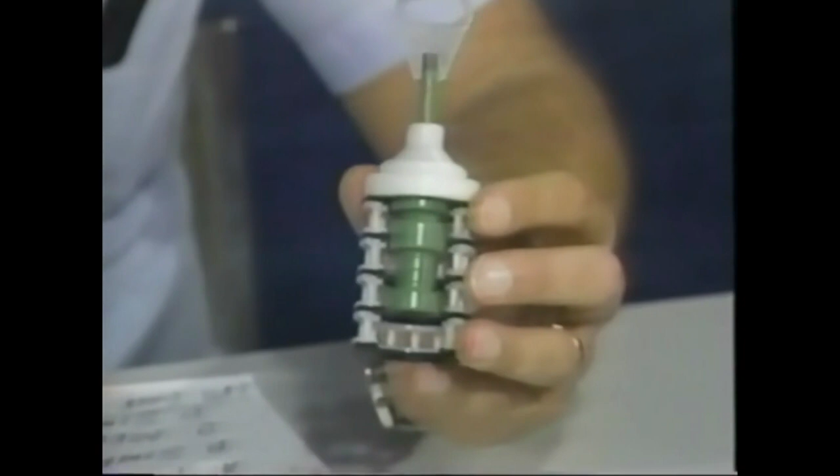A couple of the unique features in the 5600 series control I'd like to talk about at this time is the piston seal spacer concept around which the control is designed, which is really the heart of every Fleck valve on the market. The reason it's so unique is as the piston is indexed by the drive motor, it moves down and then back up through the stack of compressed seals and spacers, completing its regeneration cycle. As it does this, the piston lobes are wiped on the inside diameter of each of the seals, and we can, in effect, call the control self-cleaning.

The second feature related to the piston design is the hole in the center, which equalizes the pressure above and below the piston at all times. Since the piston is the only in-stream moving component, we keep the pressure inside of the valve balanced so that the motor which drives the piston is not working any harder if it's on 120 pounds inlet pressure versus 30 pounds inlet pressure. The other feature available in the 5600 series control is the meter option.

You notice that the impeller in the meter moves quite freely and is quite sensitive at low flow rates. It can register flow rates as low as 0.15 gallons per minute, or as small a quantity of water as a pint per minute, and it's accurate at low flows of 0.25 gallons per minute, approximately a quart. The meter monitors the flow of water coming from the outlet port of the control and registers quantitatively how much water has been used since the previous regeneration, therefore scheduling subsequent regenerations only after the entire capacity of the softener is expired.

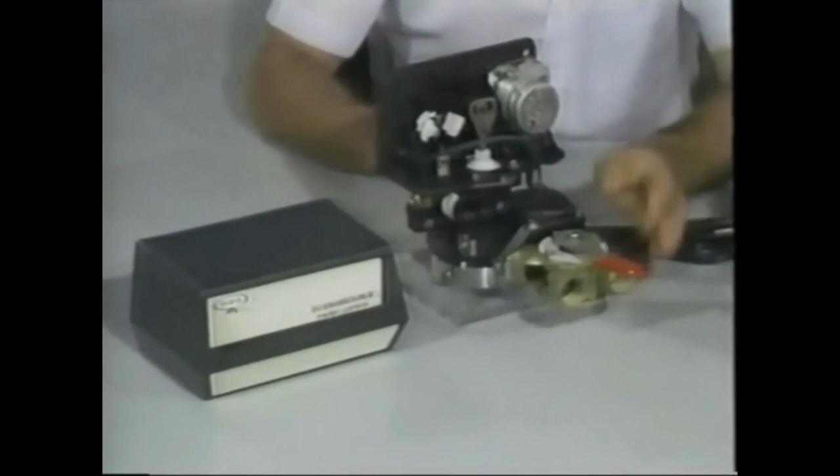Bill, the L backplate provides the same function whether it's metered or day clock version as a standard 5600, but it does give a different appearance to the basic design. Also, from a service aspect, when you take a look at the exposure of the back cover assembly, the timer and the basic parts in back of the control valve are fully exposed and much more easily accessible.

One other thing I should have mentioned is that I referred to the 12-day model and the meter model. We also have a 7-day skipper wheel model, so we can offer 12 or 7-day programming or the demand meter. Now we're going to take a closer look at some of the design options, and we're going to use some slides at this point.

To summarize our design options, we'll begin with a view of the 5600 12-day control, which is a lead-in page in the catalog as well as a cover page for many of the service manuals that our customers use. It also resembles the ad which appeared in the trade magazines over the last 5-6 years when we advertised the 5600 series control.

Here we have the 5600 meter control, trade named Econominder, catalog title page, and it is also resembling the ad which appeared in our trade magazines over the last 5-6 years. And it appears in this picture here, the standard housing without the cover.

The 5600 main valve body design is illustrated here, and note we have our piston seal spacer parts group, we have our yoke option, and we have our injector drain module assembly, which includes a brine valve, injector throat nozzle and screen, injector cap, and the brine line flow control assembly.

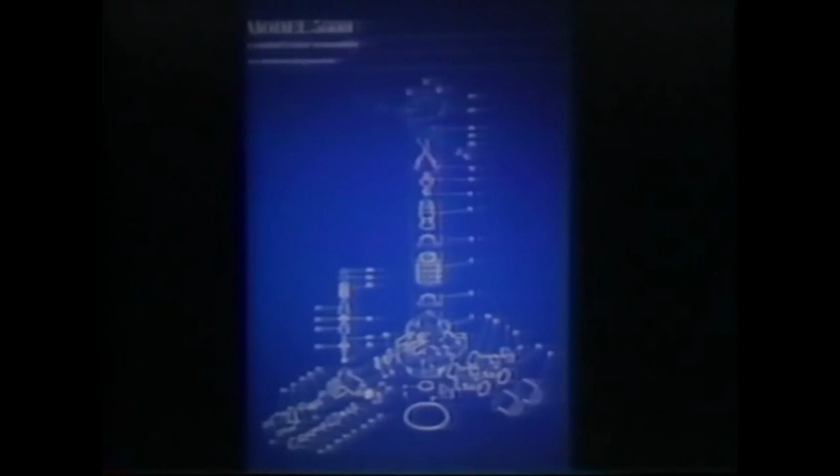What's really convenient about the design of the 5600 valve body assembly is that it can serve either a 12-day clock model control or a 5600 meter control application. The body assemblies are completely interchangeable. Here we're illustrating the 12-day Powerhead assembly.

The top half of the illustration shows the parts that attach to the front of the clock case, while the bottom half shows all the parts that mount to the back. About the only thing you'd service in the field on the Powerhead assembly, or replace, would be the motor assembly itself. Electrical voltages available are 24 volt, 110 volt, or 240 volt.

To point out another significant design feature in the 5600 control, we've cut away the clock case from the timer assembly to show you the side view of the three main gears on the back side of the timer. That gearing is all plastic to plastic, 3/8 inch thick, and it ties in with the feature we told you about earlier regarding the way the piston is designed.

Remember, the hole in the piston equalizes pressure throughout the valve body, which makes it easier for the control to transfer into regeneration. The thickness of the gears we've chosen to go with here is really about 3 times thicker than we have to be, because we don't need heavy-duty gearing to transfer that workload from the motor, due to the fact we've equalized pressure in the valve body by drilling that hole through the length of the piston.

We do this because many times people comment that they believe the valve is of superior design mainly because we made the gears thicker, which in their mind makes the gears stronger and less likely to crack. But really the story begins way back with the design of the piston equalizing internal pressure in the valve, which makes the job so much easier for these gears to function without breaking.

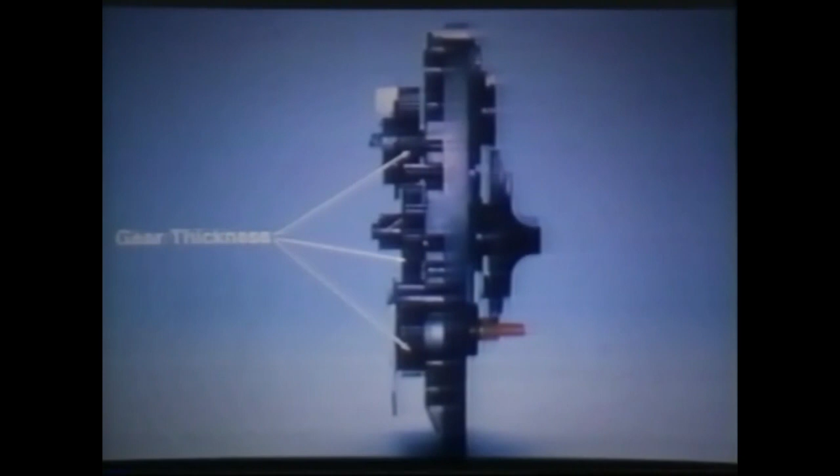This is the 5600 meter Econominder Powerhead assembly, and it bears many resemblances to the 12-day Powerhead we just looked at, but the main differences are our meter program wheel, and then our cable and clutching assembly.

Oftentimes the question is asked, can we rebuild a 12-day clock housing into a meter clock housing? The answer would be no, because notice we do have a pinion that must come through the front of the clock housing in order to drive our meter program wheel.

So if you started with a 12-day clock housing, you wouldn't have the proper face label on the control to accept the meter feature. Also, our instructions over in the left-hand corner on the label for setting the clock are a little bit different for the meter control versus a 12-day control.

Our bypass valve illustration reminds us that the internal plastic plug, located within the rubber boot, is the moving part. There is no in-stream moving part, which is the main design feature of the control, in that the valve may be in service or bypass position for an extended period of time, but we don't have to worry about it becoming stuck permanently, because when we transfer it to the other mode, the part that moves is actually out of the stream of water.

This slide summarizes the options available on the plumbing end of the control system. Here we have a 3/4 inch bypass that's also available in 1 inch. This particular model is nickel plated. Then we have the 1 inch and 3/4 inch brass yokes, and here we've got the brass, either 3/4 or 1 inch, bypass.

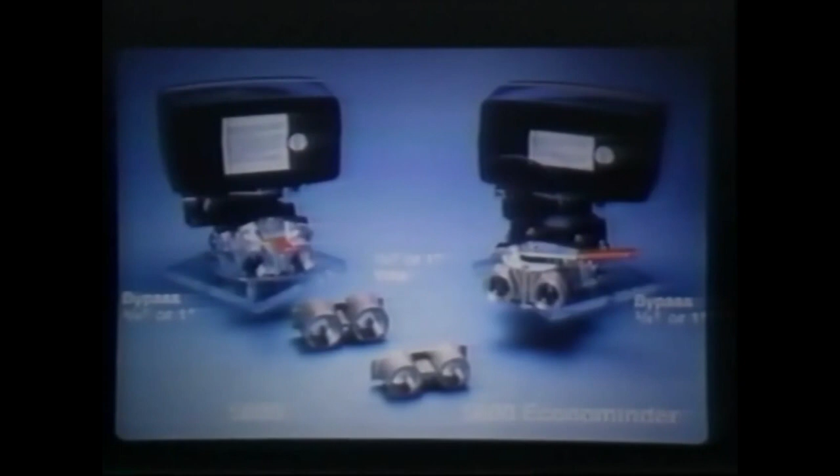Here we show the 2 basic color combinations available in the face labeling on the control. On our 12-day model, we've got the black label with the silver blue pinstripe trim. We also offer a beige label with a brown and an orange trim.

On the meter control to the right, this is the trim that has been advertised in the trade magazines over the last 4 to 5 years. It's probably the most popular trim color, the orange, beige, and brown. We also have the silver, black, and two-tone blue, and then we also have covers that fit the face front in beige, blue, or dark gray.

When training a new serviceman, the easiest thing to do is show the man how to take things apart and put it back together. The most difficult time comes when he has to go to that first job site and analyze what the service problem happens to be. When we were training service people back in a dealership I was involved with, we came up with a mental checklist referring to 4 letters.

BTTB. When a serviceman would come to the job site, he would set his tools down, repeat those letters, and then start a systematic approach to servicing. The first letter, B, is check the bypass. Many homeowners like to play around with bypass valves. On the 5600 valve, when the handle points straight back towards the pipes, the unit's in the service position.

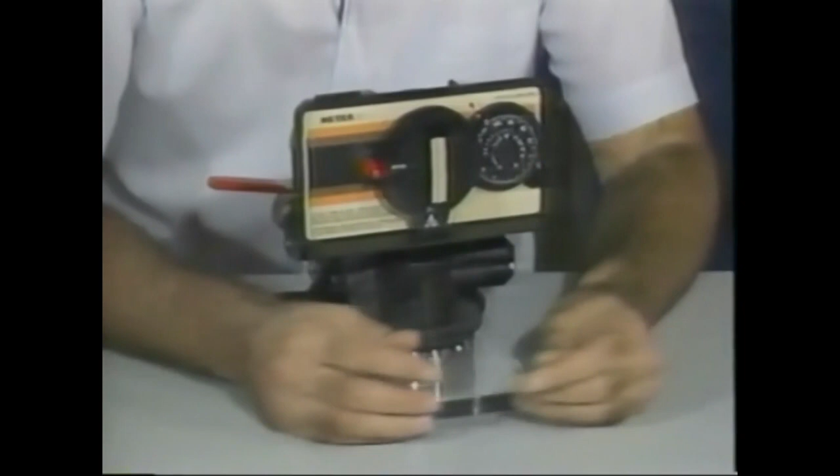Let's say you go to the job site, remove the cover off the timer, take a look, and the unit recycled last night. You check the cold water that comes directly out of the water conditioning unit, and it's 0, soft. You check the hot water, and possibly it could be 15, 14 grains hard, on that 20 grain hardness example I gave previously. The unit is going through the cycles, but for some reason it's not keeping up from cycle to cycle.

Let's say you go there and just the opposite is happening. You take a look at the timer assembly, and the unit's going to regenerate tonight or possibly tomorrow night. Again, checking the cold water right out of the water conditioning unit, you may have hard water. Checking the hot water heater, again, it may not be total hard or total soft, but something in between. Again, an example of running short of capacity.

The areas that I used to work, running short of capacity primarily ran into toilets running. When you lift the back of the toilet tank off and look where the overflow is, if that level of water is right near the top or dribbling over into the overflow at, let's say, a pint a minute, that's like adding an additional 180 gallons in a 24-hour period.

Whether it's a day clock or a meter type version, you never set the program up to compensate for that. Also, I would have calls right after the holidays—4th of July, Thanksgiving, New Year's, Christmas—where again, you set the equipment up for 3 to 4 people in the family, but now for the holidays, you have 20, 30 people over using the conditioned water.

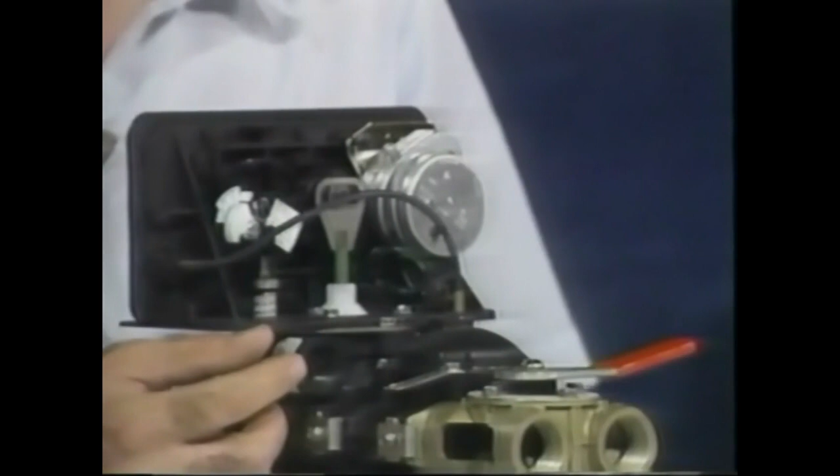Looking at the back of the unit, the only way water can get back into the brine tank is if this poppet valve right here is pushed open. When you push that open, water goes back into the brine tank, and when it's done filling on a timed brine basis, that poppet valve has to snap shut 100%. If for some reason, some foreign material or through wear and use, the valve does not 100% shut off, water will continue to drip back into the brine tank. The water level will get higher and higher.

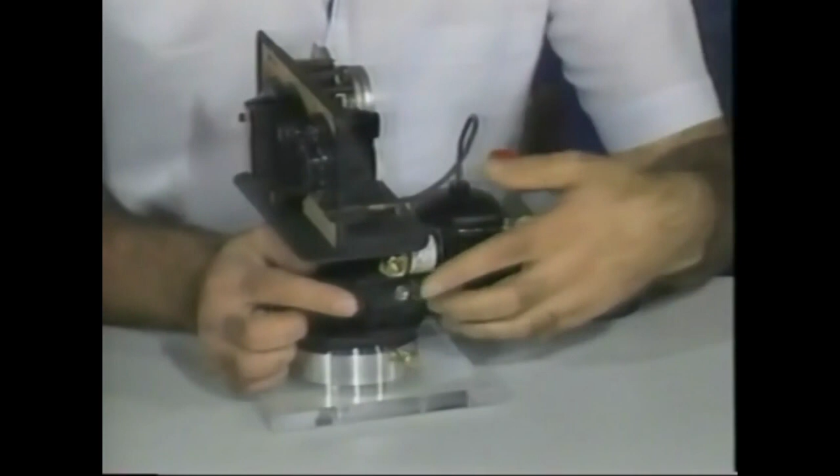To check for this very easily, with the unit in a service position, disconnect the poly tubing at the brass fitting here, or in the brine tank. No water should be coming out of that fitting at all. If you get a constant drip or water leaking out, you know that that brine poppet valve is the key thing to key into. Also, on all time brine refill units, whenever a unit goes through its regeneration cycle and you don't draw all the brine solution out of the brine tank, the unit doesn't know it and it still puts more water back in. That key area to check would be in the injector area, which will be right underneath this cap assembly.

Let's take a look at the second condition, if you had low water in the brine tank. Again, the only way water can get back into the brine tank is if that brine poppet valve, that spring-loaded valve, is pushed open. When that happens, line pressure goes into this brass fitting right here, and inside that brass fitting is a small rubber washer. That controls the water back into the brine tank at a certain flow rate - either a quarter, a half a gallon a minute, or 1 gallon a minute.

If for some reason that small rubber washer becomes partially plugged up with foreign material or whatever, it's not going to allow the water to go back at the correct flow rate. The timer times itself out, and your liquid level will be much lower than what you normally had set it for.

The third condition is the most difficult one because you've checked the other items - the bypass, the additional people in the family. In this instance, I would tell the man now to take the cover off the unit and start cycling the unit through, cycling the unit into the backwash position. In this position, you should hear a high flow rate coming to the drain.

Advance it to the brine and slow rinse position. In this position, the flow rate at the drain should be greatly reduced, probably 1/3 to 1/2 gallon a minute. Advance it a little bit further into the rapid rinse and settling rinse positions, and again you should hear a high flow rate running at the drain. High flow rate, low, and high flow rate are normal cycles of operation.

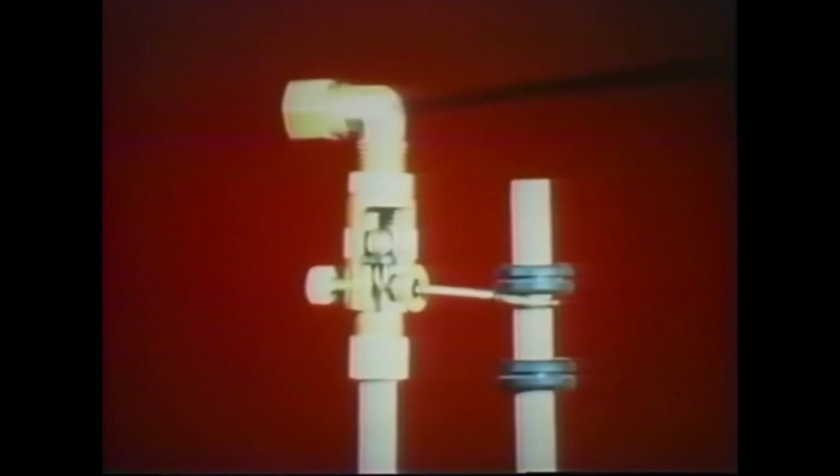As the water level starts increasing in the brine tank due to a leaky brine valve, or an injector assembly plugged up, the float assembly will start rising, allowing the ball inside the brine valve to drop down and shut off, stopping any additional flow. The service call then will basically be hard water or salty water, because too much water is in the brine tank, dissolving too much salt.

One of the key things in working with safety brine valves is the location of these rubber grommets. You should always have approximately 1 inch of space between the rubber grommets where the arm assembly comes out. If those grommets are pressed together, when the water level starts increasing, instead of the float assembly rising straight up, it'll angle off, hit the side of the brine well, and not shut off as designed.

The other thing to watch for when working with a safety brine valve is the location of this PVC tube in relation to the brine well cap on top of it. You should always have that tube assembly down far enough so that when the water level increases and the brine float system rises, it doesn't hit the top cap and prevent it from shutting off.

The 500 air check has been around for a number of years, and we're approximately in our 3rd generation. As you noticed in the original photograph of the safety brine valve assembly, you had kind of a J effect for the air check assembly. That J air check assembly has been around since the mid-60s.

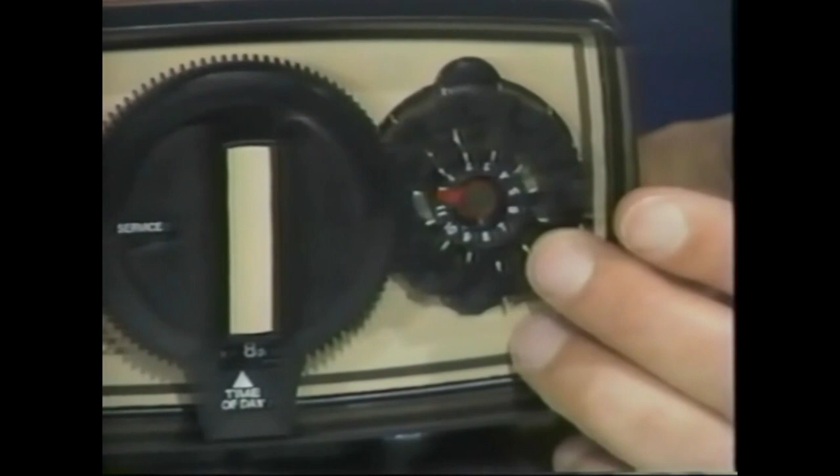If we want regeneration every second day, we would have every other tab pushed out. Every third day, every third tab, and so on. The most popular timer control mechanism on the market happens to be the 12-day, because you can do more things with a combination of 12 skipper tabs. You could regenerate every day, every other day, every third day, or every fourth or sixth day.

It's much more flexible than the 7-day wheel that we mentioned was also available as an option. 7-day skipper wheels are primarily popular in your commercial industrial applications, where they normally would regenerate a system along the lines of the pattern of the days of the week or the calendar.

Okay, let's take a look a little bit at the metered control system and cover the regeneration setting procedure here. It's quite similar to the one we just talked about. We press in on the red pinion gear and we rotate the 24-hour gear left or right until the current time of day is in the bottom center window. Now, when we go over to the right side of the 24-hour gear, things are a little bit different here, because we have a program wheel, and there's one of two ways we can program a meter control.

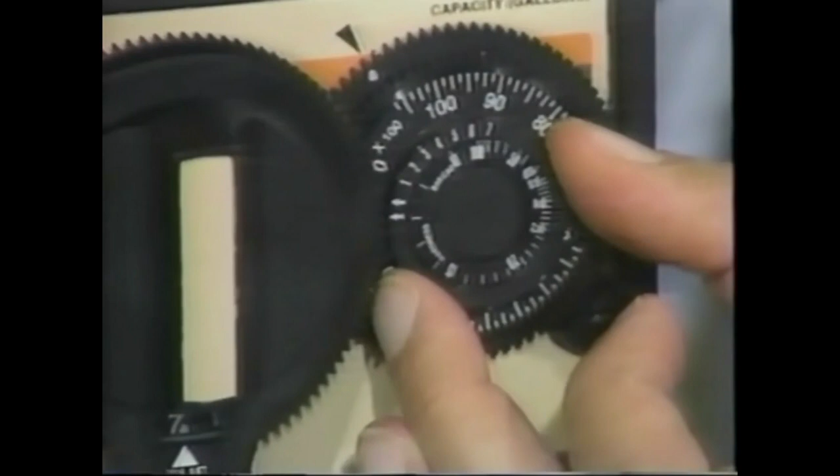The first way we can program, which would be typical of a residential application, we would dial the hardness of the water that we tested in step 2 of the BTTB formula and set it up opposite the number of people in the family. We would do that by simply holding the base gear with my right index finger, and then pulling out on the dial and turning it left or right, lining up the hardness, which is on the inside label, with the number of people, represented on the outside label, numbers 1 through 7. Now, when we have 24 grain hard water and let's say 4 people in the family...

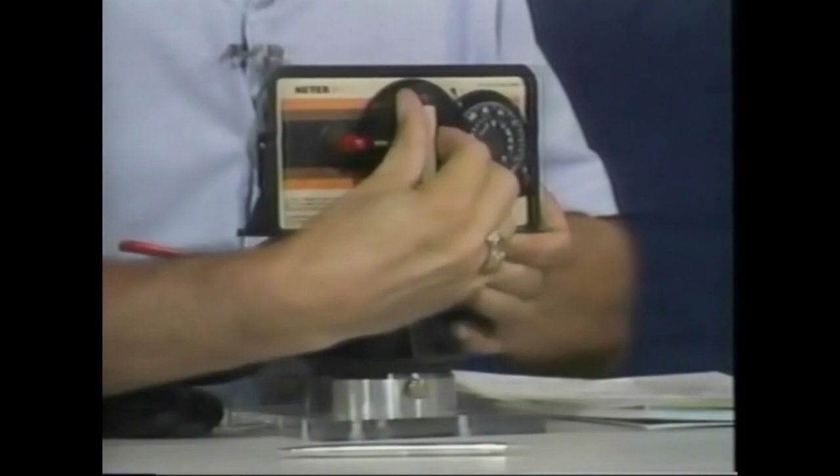We would dial 24 opposite the 4 people and then index the program wheel all the way counterclockwise until it stops, and then simply manually rotate the main dial in the front 360 degrees. That arms the program wheel so that it's at the proper beginning spot for that combination of hardness and family size. Now, the second way we can program a meter control is a method that would be commonly used in commercial and industrial applications.

That's where we program in terms of gallons between regeneration. Now, obviously, with no family size to make reference to, that would seem like the natural thing on most industrial commercial applications. So just picture this program wheel without a people label or the outside dial or the hardness label, which we used to orientate with in the first example. Now what we would do is calculate how many gallons of capacity the unit is going to give us with the salt setting that we have.

For example, let's say we had a cubic foot unit, 24 grain hard water, and we were brining it at 8 pounds of salt. Well, that would yield 24,000 grains of capacity, or 1,000 gallons.

Now, if the business the unit was installed in, for instance a restaurant, used an average of 300 gallons per day, we would subtract 300 gallons from the available 1,000 gallon capacity and call that reserve. Then take the 700 gallons remaining, the usable supply, and holding the base gear, pull out on the program wheel and line up the number 700 in the gallon label, the outer label, opposite the white dot on our wheel. That tells us we're now programmed for 700 gallons between regenerations. But as in the first example, we always have to orientate the program wheel to the current time of day.

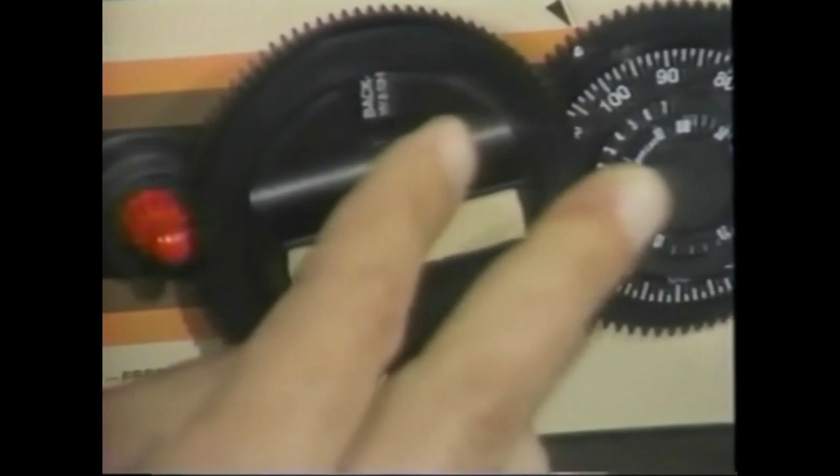Okay, let's say we wanted a manual regeneration because we were expecting company in a residential application, or in the case of that commercial application we just covered, we had an extra busy day at the restaurant. To get the manual regeneration, we would simply turn the manual knob approximately 2 clicks, and we should be able to read the abbreviation regen in the cycle position window. At that point we can walk away from it and the unit will regenerate automatically. The timer motor will engage the gearing and bring our main gear all the way around.

The unit would regenerate at whatever time of day we initiate it. Now typically the controls are set up at the factory for a fixed 2 a.m. regeneration. On a 12-day model, the red arrow on the skipper wheel indicated the next time at 2 a.m. that the unit would regenerate if the tab were moved away from center. In the case of the meter control, we always have a reserve capacity to take us from the time the meter wheel zeroes out until the next programmed regeneration, which is going to be at 2 a.m.

But let's say for some reason we don't want a 2 a.m. regeneration. For instance, it's a business where there's always water being used at that time of day. Or in the case of a residence, the man of the family works, gets home at 11 o'clock in the evening, maybe doesn't go to bed right away, and showers at 2 or 3 in the morning typically. Well, we can show you how to have that unit regenerate at a fixed time of day other than 2 a.m. We'll get into that with our slides a little bit later on, but it is possible to have the timer field adjusted so it can regenerate consistently at some other time of day than 2 a.m. We'll demonstrate that when we use the slide set in just a few minutes.

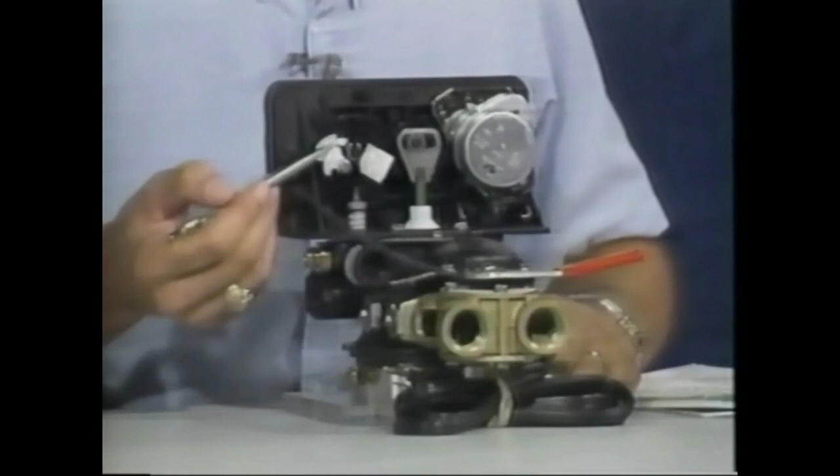There's a 3 to 18 pound salt scale, which tells me the brine line flow control button is refilling the brine tank at a rate of 1/4 gallon per minute. Or the second scale we might run into on a control would read 6 to 36 pounds, which would tell me we have a 1/2 gallon per minute brine line flow control button. Whichever label we have, we must select a position for the white lobe pointer so we know the volume of salt used per regeneration. Now, how much salt should we use?

That's a question of how much resin or capacity by volume there is in the tank. For instance, in our example of a cubic foot unit, let's use 8 pounds since that's a fairly universal medium salt setting. With 8 pounds of salt, we would recover 24,000 grains of capacity. All we'd have to do is loosen the center screw and make sure the brine lobe, the white lobe pointer, ends up on 8 pounds, then retighten that screw. Every time the unit comes around during regeneration, the refill poppet valve will be open for the amount of time that allows enough water, which will dissolve 8 pounds of salt, to enter the brine tank.

Now, if we wanted to change this, we have to be very careful with demand regeneration systems, because when you cut a salt setting, you're really reducing the recoverable capacity of that unit. We generally never want to reduce a salt setting on any demand system, because the meter is programmed for the number of grains of capacity based on the original volume of resin and the original salt setting the manufacturer put on the unit. If we cut that salt setting, we'll come up with some volume less than 24,000 grains, as in our example. Conversely, you should not arbitrarily increase the salt setting either, because the unit will still regenerate as though it only had 24,000 grains, and now we'll be wasting salt, and the homeowner won't be very happy with that.

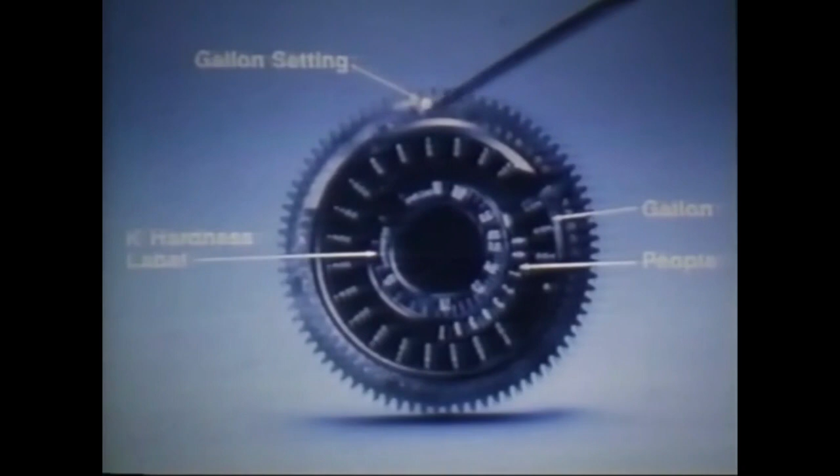We might want to do this in a situation where a 2 a.m. regeneration is not desirable. If we disassemble the timer manual knob assembly and get access to the 24-hour gear, we can lay another label down right on top of the label that's already in position on the 24-hour gear.

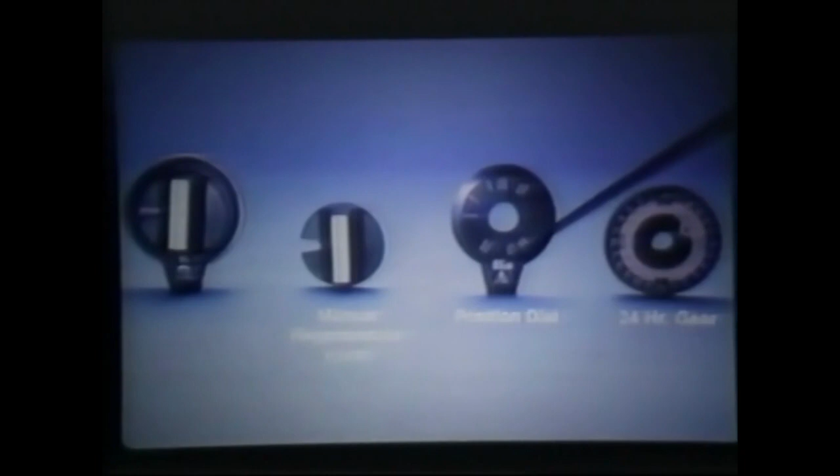Let's say we wanted the unit to regenerate at 6 a.m. every morning. We would take that new label and line up the 6 a.m. right on top of the 2 a.m., then stick the label down in that position. What we've done is offset the timer 4 hours. We just reassemble the assembly and dial in our current time of day, and we have in effect cheated the timer by 4 hours by intentionally mislocating the label that 4-hour interval.

Every motor is date coded with a 4-digit number. The number 2144, for example, would represent February 14th, 1984. We decipher that by taking the first digit, which is a 2, representing the 2nd month of the year. The middle 2 digits, the 14, represent the day of that month the motor was made. The last digit, the 4, is the last digit in the year. Again, that would be February 14th, 1984.

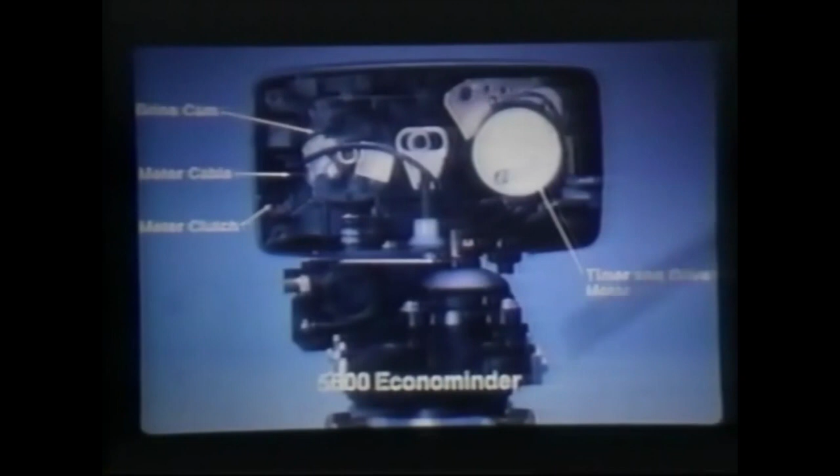This illustration is very, very important in applying the control properly. We've got our brine valve assembly and our brine gear assembly. The value we have our brine refill lobe dialed to, in this illustration it's on number 18, indicating 18 pounds of salt with that setting, really determines if the system's going to work right, wrong, or marginally.

If we have too much salt, we're wasting the homeowner's money. If we don't have enough salt, we could be in trouble if it's a meter control system, because it's going to be regenerating 1 day too late or 2 days too late since we're not creating enough capacity with an insufficient salt setting. So the best thing to remember is let the manufacturer be responsible for setting that salt setting, and let's not increase or decrease it without having some valid reason for doing so and knowing what we're going to get if we increase or decrease.

Because that's such an important aspect of the operation of the control, we're going to look at the salt curve on the next slide. We're just going to review what kind of capacities you can expect on a hypothetical conditioner with various salt settings, and that hopefully will keep you current on what capacities you can expect with various salt settings and various size systems that you're working with.

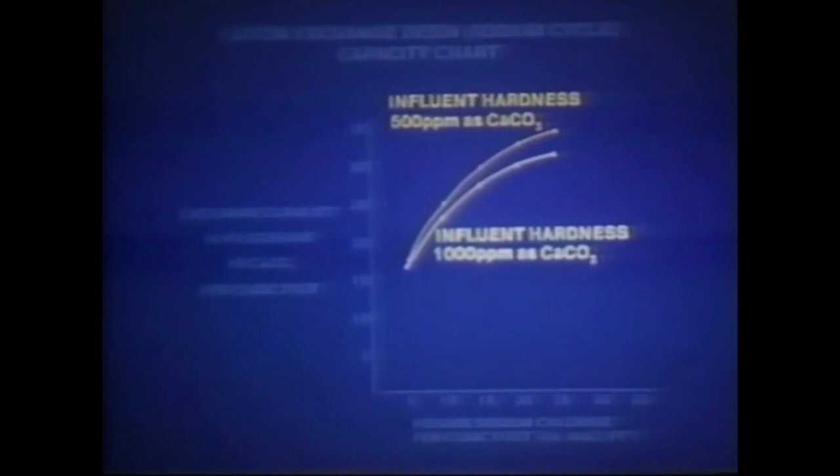This slide we can use to show two things. The first, what is the most economical salt setting? Well, if we use 10 pounds versus 15, we would recover 25 rather than 30,000 grains. From an operating standpoint, the 10-pound setting is more practical, because if we go from 10 to 15, we're using 50% more salt, but we're only getting 20% more capacity. Over a period of a year, that would be bad economics for the owner of the water conditioner.

What we want is a trade-off between economy and operation and the conditions you're working with, namely the hardness of the water at the job site. The most common setting, the medium salt setting as it's referred to, is 8 pounds per cubic foot, and that makes a good setting in areas where the hardness runs anywhere from 10 up through 20 or 25 grains per gallon.

When we get into extremely hard water, we're going to want to go towards the 15 pounds per cubic foot setting, especially if there's iron in the water along with the high hardness levels. The reason is we want to protect against bleed through when we get near the end of the capacity of the bed. We want the full capacity in there working for us, and because our hardness is so high, just a little bit of bleed through could give us 5 or 6 grains near the end of our capacity in that unit.

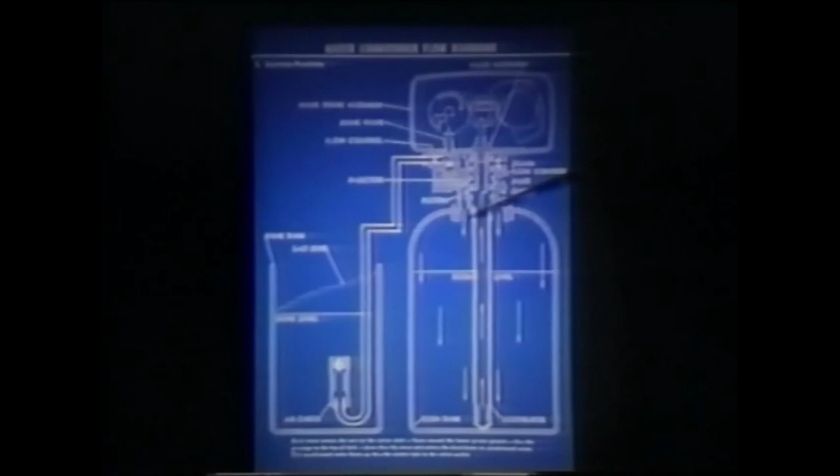Now we're going to take a look at the cycles of operation of the 5600 control. Right now we're illustrating the service position. In the service position, water comes into the inlet of the control, down into the top of the tank on either side of the distributor tube, filters down through the resin and into the bottom opening of the distributor tube, then up the tube and out the outlet of the control.

When we've used the full capacity of the resin bed based on the hardness of the water, the control either regenerates in response to the skipper wheel setting on a 12-day clock, or the meter, which has registered the water as we used it during the service cycle, and a regeneration begins.

The caption along the bottom of this drawing simply explains the operation of the cycle, and in the service manual that comes with the control, it's a handy reference item for servicing the control, whatever cycle of operation it may be in.

All we must do is read the caption at the bottom of that particular cycle, and we'll be tracing for ourselves the flow and direction of the water. It's fairly simple to track down why the control isn't functioning properly using the directions given in the caption and the arrow highlights in the drawings.

The first thing that happens when we go into a regeneration sequence is what we call a preliminary downflow rinse, and the duration of that cycle is approximately 5 minutes.

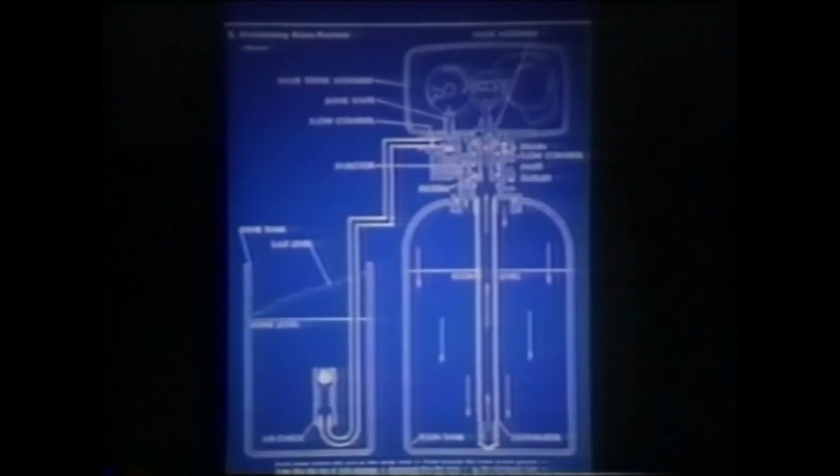There are 8 cycles in all that we're going to talk about. Think of the first 4 as occurring while the piston travels down through the valve, and the second 4 as occurring while the piston returns back up to its upward position. The time cycles on the down side have to be exactly the same number of minutes as the cycles on the upside of the piston movement. The only difference is that when the piston is returning back up to its service position, the cycles occur in reverse order.

In this preliminary rinse-down cycle, the water is actually flowing in the same pattern as it would in the service cycle: it comes down through the resin, up through the distributor tube, and out the outlet.

The preliminary downflow rinse cycle is followed by the backwash cycle. Duration of this cycle is 10 minutes. The function of this cycle is to bring water into the inlet of the control, down through the distributor tube, out the bottom, and up through the bed. Notice that we're flowing in exactly the opposite direction as we did in service and preliminary rinse.

The purpose again is to lift the bed so that any trapped particles on top are rinsed to drain, preparing the resin bed for the following cycle, when we draw brine in to recover the capacity of the unit. Over in the brine tank, our liquid level stays the same because we haven't started to draw the brine yet. All we're doing is expanding the bed, lifting out all the trapped solids on top, and putting them down the drain.

Following backwashing, we move into the brine cycle, which is a fixed 50-minute time setting. We also combine within that 50-minute time frame what we call the slow rinse cycle, which will be illustrated on the next slide. Notice in the valve, we're sending water at inlet pressure through the injector screen up into the cap and back into the injector nozzle, where it's allowed to create a vacuum to draw the brine from the brine tank.

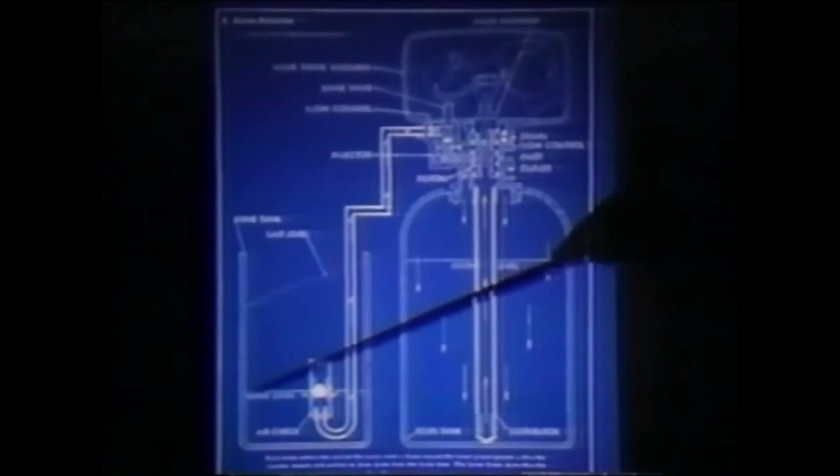Notice our liquid level in the brine tank is now down even to where the ball check is sitting on the seat in the valve. We're going to draw until the ball gets to that position, because of the vacuum created by the injector assembly. Now when the ball check seats in the air check assembly, the injector continues to be fed inlet water, and that's known as our slow rinse cycle.

In the next illustration, the direction of flow through the bed will be exactly the same as in the brine draw, except we're not sending brine through during the slow rinse, just rinse water. The number of minutes of that 50-minute cycle that we're actually drawing brine ends up to be maybe 14 to 17 minutes, approximately 1/3 of the 50 minutes. The remaining 2/3 is the slow rinse cycle. We keep that proportion of 1/3 brine time to 2/3 slow rinse by the injector we recommend on the various size units.

Our slow rinse cycle is appropriately named for the balance of that 50-minute increment, the last 2/3 of the time, because we want to rinse the salt out at a very slow rate. Since brine is a heavier liquid, it naturally gravitates toward the bottom of the resin tank, and the fresh water coming in during the slow rinse from the top of the tank down needs to come in slowly enough that we don't disturb the bed. If we sent it in at a very rapid rate, we might churn the resin, disturbing the stratified manner in which the brine is being rinsed out.

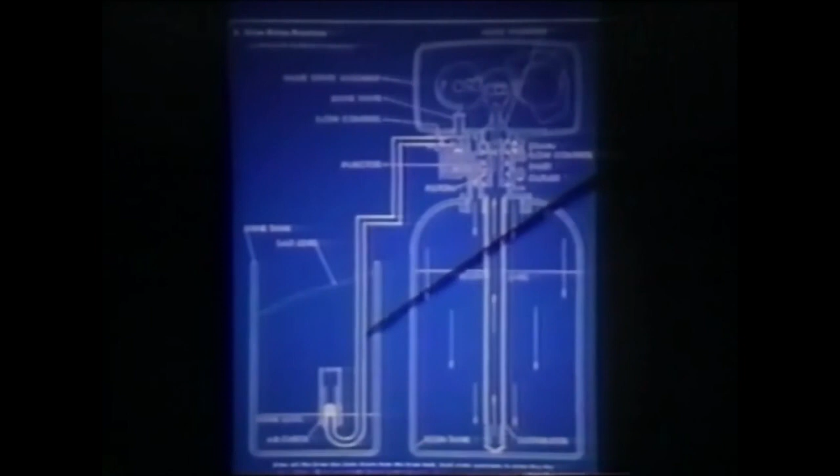Notice over in the brine tank, nothing has happened yet. Our air check ball is still down in the very bottom of the air check cage, and nothing can happen until 2 cycles from now when we refill the brine tank, getting it ready for the next regeneration to follow.

Now we're entering the rapid rinse position, another 10-minute sequence, which relates back to our backwash time when the piston was coming down through the bore of the valve. That first 10-minute increment was the first backwash cycle. Now we're on the upward movement, past the midpoint of regeneration, and the piston lobes are passing the midpoints of the spacer, which allows our rapid rinse after regeneration. The piston is just moving in the opposite direction, driven by the same motor speed, so we have the same 10-minute time increment.

What's happening here is we're coming down the distributor tube, lifting the bed a second time. We've already changed the physical size of the resin beads because the brining has been completed—the beads actually shrink in size after exposure to the sodium in the brining cycle. So if we were in an area with iron in the water, we might find the surface of the resin beads coated with iron. Because the bead physically shrinks about 10% in size due to the brining cycle, we have a second opportunity to rinse out some of that iron, as a result of bead-against-bead abrasive action in this second backwash.

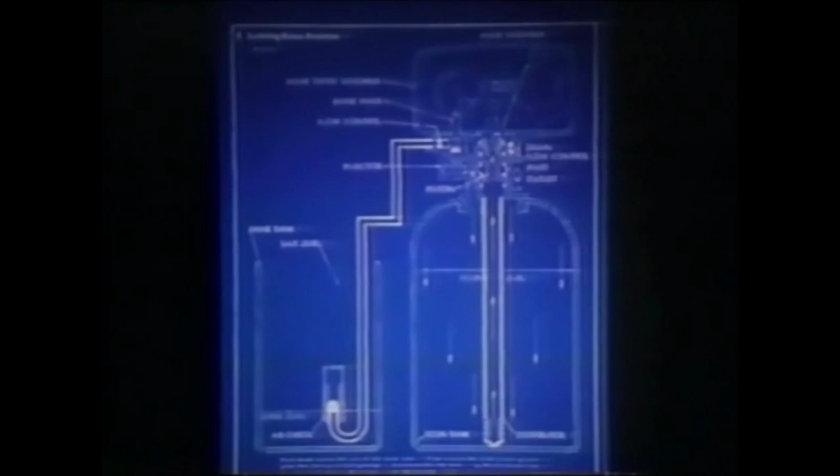Our last cycle of operation in the 5600 downflow brining control system is a brine tank fill. Our inlet water coming in the inlet side of the control supplies both the injector so that it can find its way over and down into the brine tank, and it's metered by our little brine line flow control button, and water is allowed to pass through this cavity for the number of minutes that the refill lobe has pushed down on the spring-loaded brine valve.

And if we were to draw service water during this cycle, the inlet of the valve would also supply a source of water to go down through the resin bed so that we would have conditioned water available if we chose to use any of the service taps during brine tank fill. And that completes the regeneration sequence for the 5600 control.

The injector drain module assembly for both the clock and the meter version of the 5600 are common to both controls. The injector drain module assembly also contains 4 key parts in the control valve for any type of servicing. When we get into it, I'll show you that it contains the injector, screens and jets, the brine line flow control, the brine valve, and drain line flow control assembly. I'll also try to relate those things back to the BTTB and the general checklist in servicing.

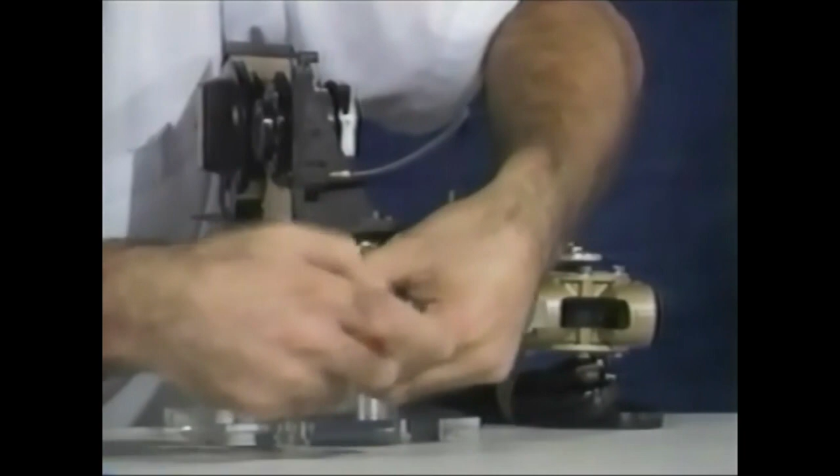To get into the drain line flow control module, we have to remove these 2 cap screws, using a 5/16 nut driver to take those out. The cap assembly will come off. Then grabbing towards the rear of the module and swinging out like a door, that module assembly will come out in your hands.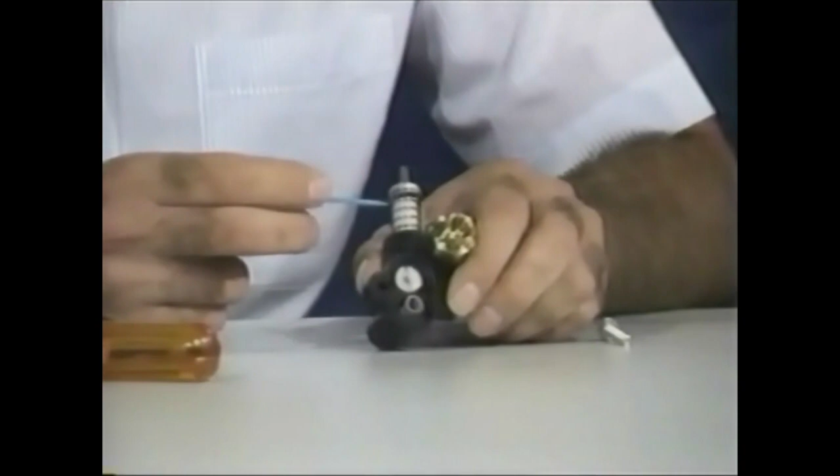The thing that we're keying into first will be the injector assembly: the screens, the injector nozzle and throat assembly. Common problems if this area is plugged up will be salty water, high water in the brine tank, low capacity. The flow of operation: the water enters through this screen assembly, loops over the cap and into the white injector assembly to create the venturi and draw the salt solution out. If for some reason this screen becomes plugged up with sand, silt, sediment, whatever, that flow stream of water will not flow properly into the injector module and will not create the venturi and not draw the salt solution out.

You can clean it with a toothbrush, muriatic acid, whatever, as long as it's a nice clear flow pattern. When you get into the injector assembly, you have 2 parts in any of our injectors: the throat and nozzle assembly. The nozzle is the first part you see and can be cleaned out relatively easy with a toothpick by just poking it into that area. We'll poke anything through and get it flushed out when it goes into the regeneration cycle. If you did have to remove the injector assembly, it comes in 2 parts. The nozzle comes out first.

You'll notice as we take these parts out that they have a common color to them. Both our injector nozzle and throat assembly are color-coded to represent different sizes for different styles and types of tanks. The type we have here is a number 1, which handles 8, 9, and 10-inch diameter tanks.

If you remember the colors of the flag, red, white, and blue represent 0, 1, and 2, also representing your 6 and 7-inch diameter tanks for 0, 8, 9, and 10-inch tanks for number 1, and 12-inch diameter tanks for blue. We even go beyond that, with yellow and green for 13, 14, and larger sizes of tanks. But the key thing is both the nozzle and the throat assembly must match in color.

You cannot mix yellow and red, blue and white. White has to go with white, red has to go with red. When you reassemble them, you do not have to put any type of sealant on the threads, and all you have to do when you get it into position is just snug those areas up.

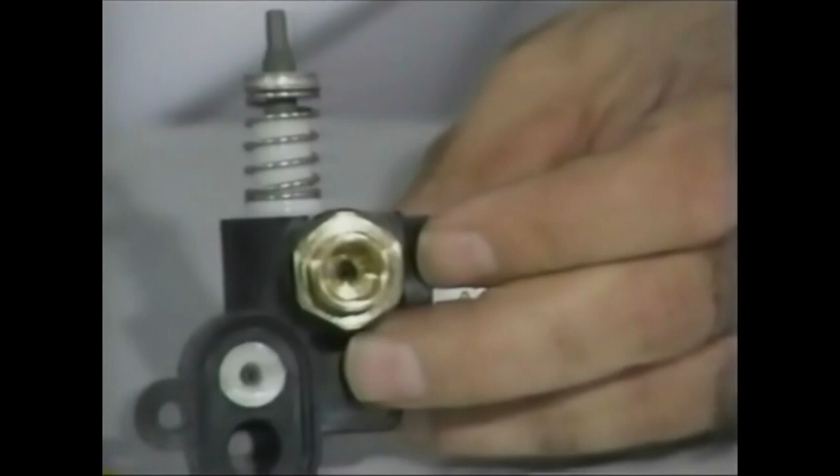By removing that brass fitting and turning it over, taking a look into the back section here, you'll see a little white cage and the rubber washer.

Taking a paper, a toothpick, or a paper clip, you can push that cage assembly out, and what we're going to be looking at is that little black rubber washer. That hole in the center can become plugged with foreign material.

If it's partially plugged, it's not going to allow the water to go back into the brine tank at the proper rate, giving you again the low water level.

Once that area is cleaned out, reassembly has a correct and incorrect position. There are two sides to the rubber washer. One side has a bevel in the inside hole with a bunch of numbers around the outside, and the other side is blank, straight cut across.

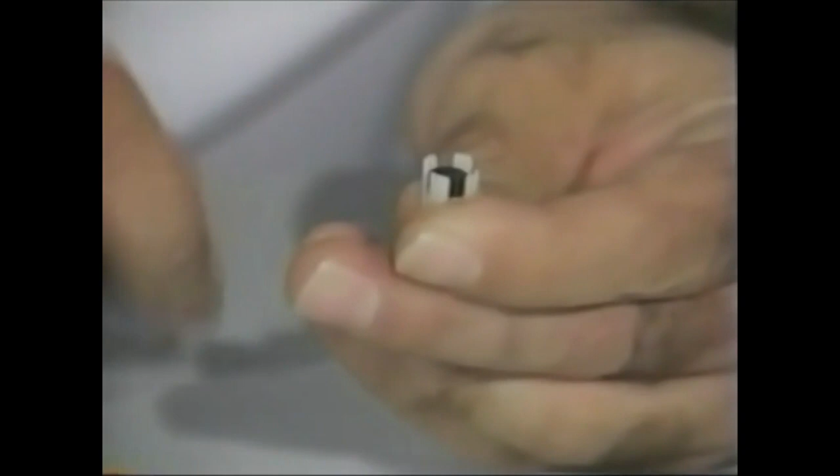The white cage assembly has no top or bottom. When reassembling, after you've cleaned that area out, take it so the numbers face down into that cage, then take your fitting and slide the white cage up, so that when you look into the back section here, you're going to see the bevel or numbered side.

This assembly is like a check valve. When we're flowing into the brine tank, the flow of water goes in this direction and the rubber washer is pushed into the brass fitting, so it's controlled through the center.

When we're in the draw cycle, the reverse happens. We're drawing in this direction and that rubber washer is pulled away from the brass assembly, and the brine can pass around the outside, through the four legs, and through the center unrestricted.

So, putting it back into the control, lubricate this O-ring with silicone, rotate it back in, and tighten it down.

Also noting on the assembly here, there is a label, and it has a 0.25 gallon per minute refill rate. That'll correlate with the 3 to 18 pound salt setting that Bill had mentioned previously. If it had a black label, it would be a 0.5 gallon a minute refill, giving you 6 to 36 pounds of salt. Or it could be a red label, which would be a 1 gallon a minute refill. But the label should refer back to what your salt setting was on that salt cam.

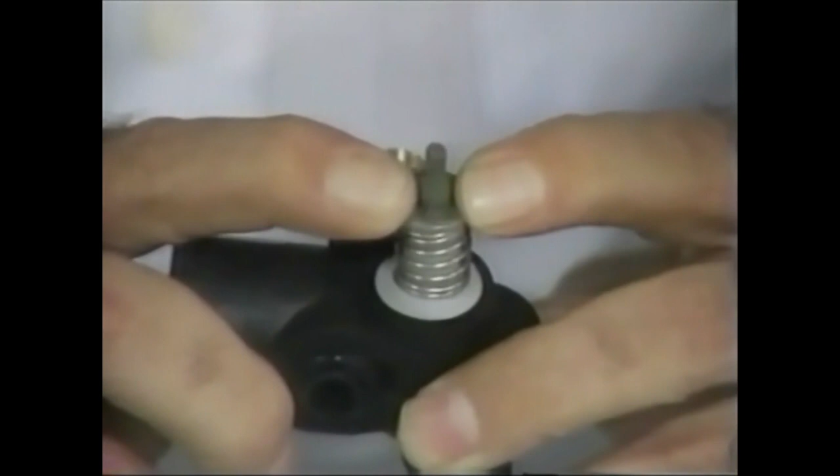The third area we're getting into is our brine valve, this spring-loaded poppet valve assembly. As I mentioned before, if for some reason when this is done refilling the brine tank it doesn't snap shut 100%, water will continue to drip back into the brine tank.

Disconnecting the polytubing here, when the unit's in a service position and water starts leaking out, that'll indicate you have a defective assembly.

To get into this assembly, it's just O-ring loaded. You just pull straight out, and that assembly will come right out.

The key thing you're looking for in this assembly is the rubber seat. As you push down on the spring, you'll see that half-moon rubber seat assembly. If there's foreign material underneath there, it'll cause a leak into the brine tank. Or, after a period of time, if it becomes worn, it also could leak back into the brine tank.

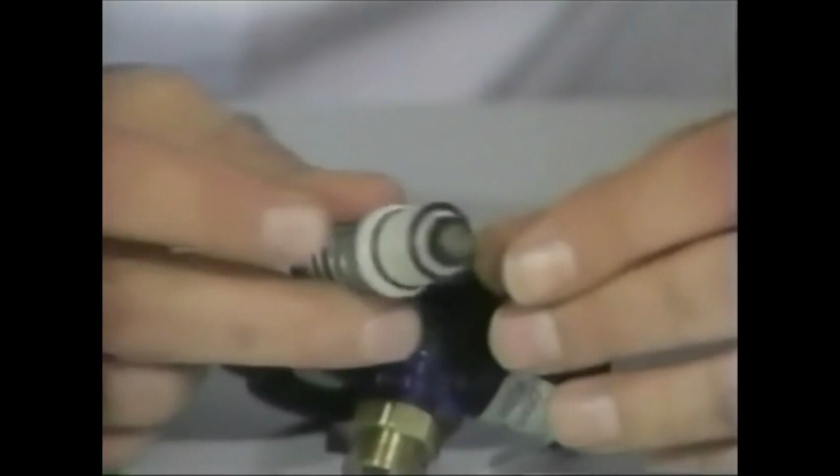The key thing, once you've inspected or replaced it, is taking a look inside the housing itself, because you'll notice that buried along with the black plastic is another black O-ring. If for some reason you have to take that O-ring out, replace it, or inspect it, you should never put the O-ring on the end of this assembly and try to reassemble it in this manner. If doing that, you'll end up rolling, tearing, or chipping that O-ring every time when you try to get it back into the module.

So if that O-ring is removed, first thing you want to do is just lay it down in there towards the bottom. Put a little silicone on the bottom there. Put the brine valve in like so. Now you cannot push down, because what's going to happen is that poppet valve assembly will bottom out in that valve body and you won't get it to seat properly.

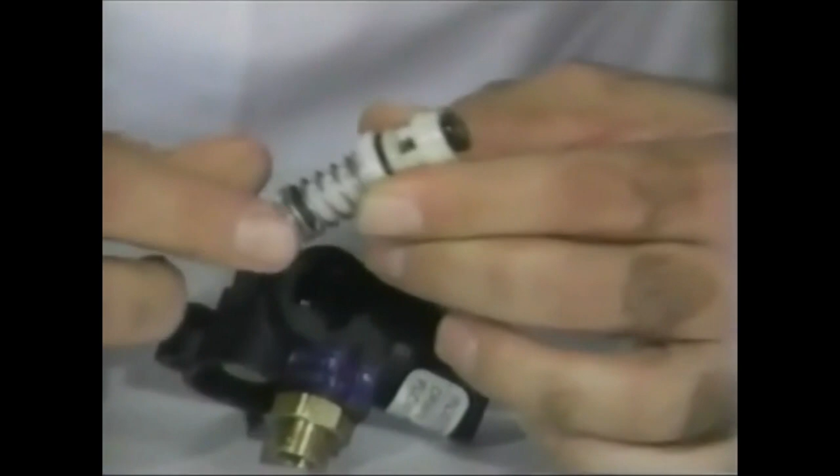You want to lay it in here and take your thumbnails on the sides and push down so that that shoulder of the seat remains flush with the valve body. If you don't have thumbnails or you have stubby thumbs, you can take a 1/2 inch Schedule 40 PVC, about 2 inches long, cut a section of that off. It'll slip over the spring assembly and catch the shoulder and also be able to push it in. If you don't have that available, you can take a crescent wrench, open it up, just catch the shoulder and push it down.

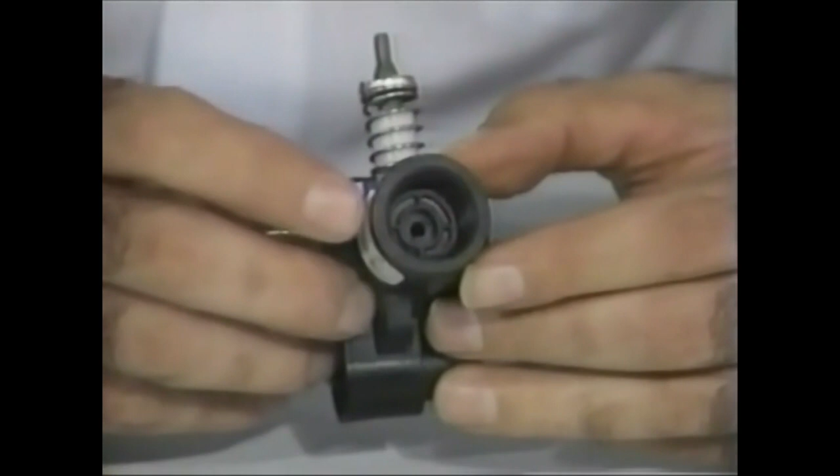If you look way down in the bottom, you'll see that there's a plastic retainer with some slotted areas. You can take a screwdriver and catch those slotted areas and just take that fitting out. Or we also have a special tool, and I'll show you a little bit later here when we reassemble it. But that plastic fitting comes out like so, and there's a rubber washer, another rubber washer down at the bottom.

Now we want to take a look at things that can get backwashed up into this drain assembly. I've seen pieces of wood, nuts, bolts, rocks. If they partially plug up that center hole section, it's going to restrict the flow going out the drain, and it's just like pinching off the drain hose. Your flow at drain is going to be greatly reduced.

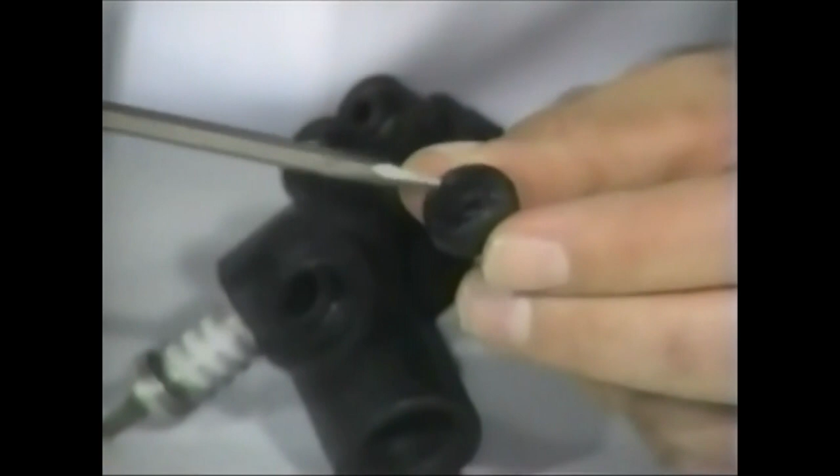You also notice that there's a bevel and a bunch of numbers on one side. That bevel, again, we want to see the flow stream of water, and that's the way we're controlling it. The numbers represented on that rubber button, the ones that end in 0, are a 3-digit number. You'll see like a 150, a 200, a 240, or a 300 representing 1.5 gallons a minute, 2.0, 2.4, or 3 gallons a minute. And if that button has to ever be changed or replaced, always match up the numbers, because that flow rate is directly proportional to the size unit and the amount of resin that you have in the tank.

Once that area is cleaned out, put the numbers and the bevel down as you put it into that drain assembly, making sure when you stick it down with your finger that it doesn't flip over. Taking your retainer, and here's a special tool I told you about. If you happen to have it, fine. You can just stick it in the slotted area and tighten down that drain retainer.

All we want to do is just snug it up. If we crank it down too hard, you can actually pinch off that rubber washer and restrict the flow and cause a back pressure on the injector assembly, and also cause problems with the functioning of the control valve for regeneration cycles. But again, the key areas, we have the injector, screen, and jets that have to be cleaned.

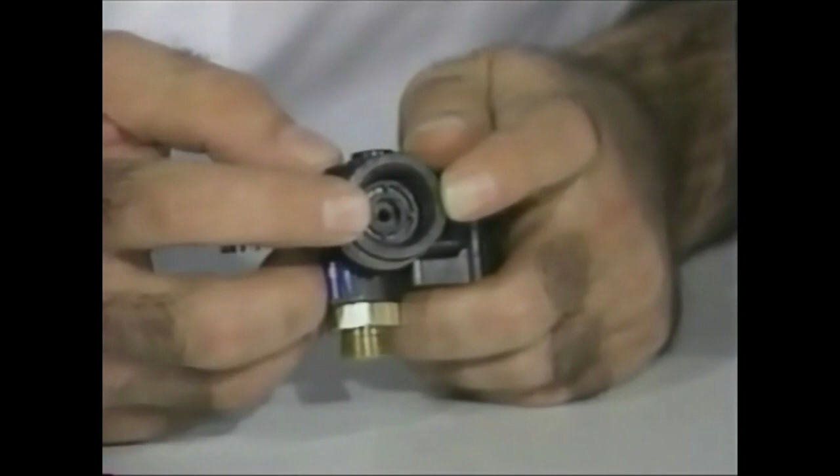High water in the brine tank, salty water. Plugged brine line flow control, which would give us low water in the brine tank. A leaky brine valve, if it didn't 100% shut off, again giving us high water in the brine tank. And in a drain module assembly, as we cycle the unit through, if there was never any change of flow at the drain, we check the drain assembly, poly tubing or whatever for any restrictions, getting inside here.

Next area we want to take a look at is having to get inside the control itself, internally. There's only one of three conditions that have to exist that you want to get inside the valve for the seal spacers or pistons assembly that Bill mentioned to you previously.

The first condition would be if we had a leak coming out the drain, the unit in the service position, and we had a drip leak or a constant stream of water coming out the drain assembly, either going into stationary tubs, a floor drain, or a sump crock.

The second condition would be if we had water coming out this stem assembly. There's a seal in this white end plug that would cause a leak coming out that end. Or if you manually tried to cycle the unit from position to position and the piston froze and you couldn't cycle it, something has jammed up internally to the control. If any one of those three conditions exist, you have to get inside the valve.

But if you have any problems due to salty water, low capacity, air in the lines, those are all external, and you would see then in the drain module assembly.

Now let's just take a look if you did have to get inside the control valve. We have three screws that we have to disconnect. The first thing is our main drive unit where this green piston rod assembly is attached to. Take that center screw out.

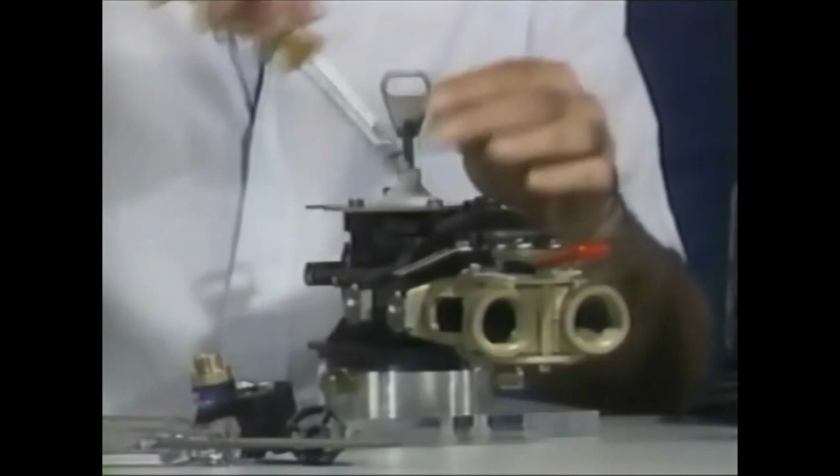You'll also notice that each and every one where these pressure points are, and we have to have an excessive amount of pressure to seal down, that we put brass inserts into the plastic and can use machine screws. We don't use self-tapping screws in this area.

Those three screws come off, the plate comes off, and now we just pull straight up and pull the piston assembly out. What we're checking for if we have a leak to the drain is the outside of that piston assembly, that it's nice and smooth and Teflon coated with no nicks or scratches on the outside. If there was, replace the piston assembly in its entirety.

If the piston assembly looks fine, lay it down to the side, and now we want to take a look inside the control and the seals and spacers that we have inside.

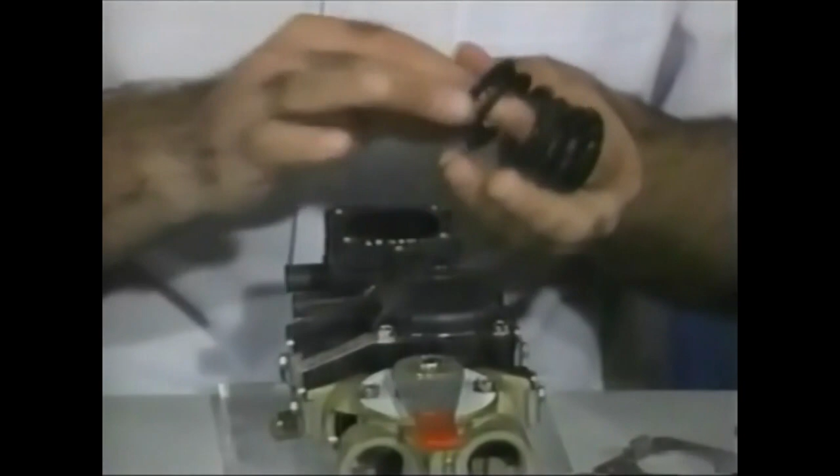The rubber seals in here, there is no top or bottom to. The same thing holds true with the plastic spacers. The rubber seals are like, let's say, the rings on a car engine, a piston assembly in a car engine. When a car engine's oil rings start wearing, you start blowing smoke or blowing oil or burning oil. The same thing can happen when the seals on the stack assembly start to wear.

Instead of sealing around this green piston assembly, they wear and leak out the drain. Suggestion is usually made to replace all of the seals and spacers as a complete assembly, because you don't know which one has worn and there's no sense taking a chance of replacing the incorrect one.

Now, like I mentioned, there is no top or bottom. The only thing you have to remember, we start off with the rubber seal, and it's like building a sandwich. We go seal, spacer, seal, spacer. When we lay those down inside the valve body bore, you always want to take your finger and rub it around on the inside, because those rubber seals, as you lay them down there, have a tendency at times, the edges, to flip up.

When we get all those rubber seals and the spacers on the inside set just properly, and we put the piston assembly back in, you're going to find that the piston assembly will stand about 1/8 of an inch above the valve body if we've done it correctly. If we've done it incorrectly, this section here will ride extremely high, 1/4 of an inch or more, or if we forgot one of the items, it'll ride way on the inside of the control.

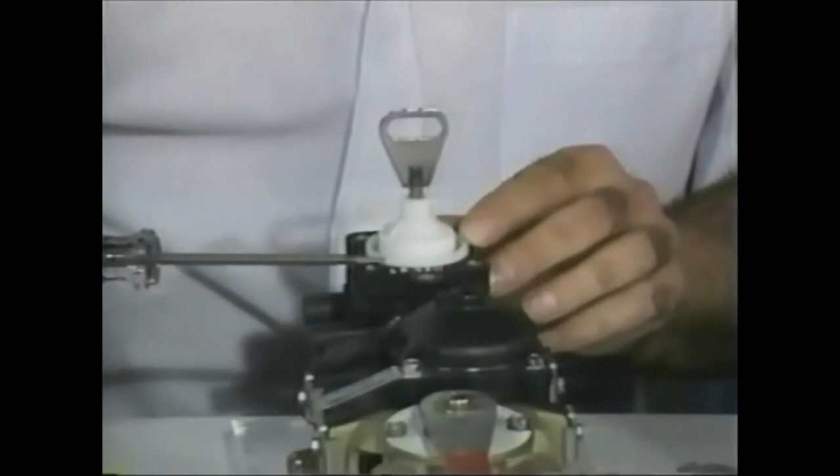So now, lubricate the outside of that piston assembly with a little silicone, lay it back in, and as you notice, the top of this end plug assembly rides about 1/8 of an inch above the main valve body.

Taking the plate assembly and the 3 small screws, starting those and noting that really there is no pattern as to going left, right, or around. What we're going to do is just crank that plate down—again you can use a 5/16 nut driver—and when we go from side to side, we're going to draw the plate down, and when we draw the plate down, we're going to kind of compress those rubber seals that I took out before around that green piston assembly.

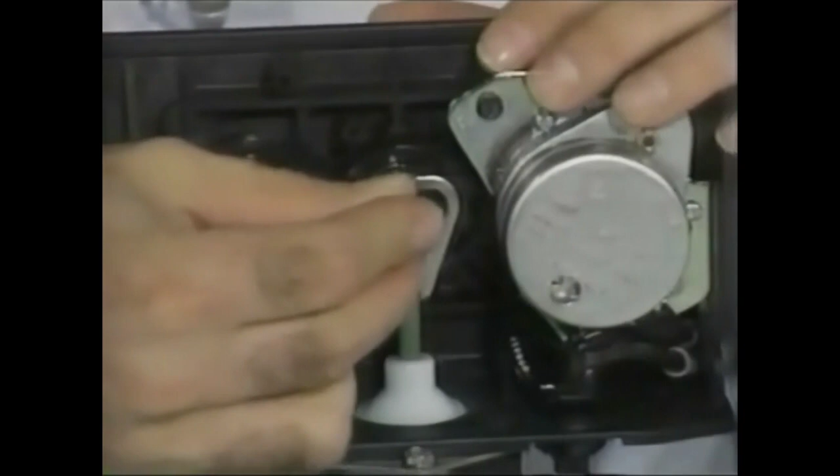That's what creates the seal. That's what the drive motor sees when it has to push that piston up and down to the various valve positions. Taking the power head, laying it on the front, noting that right here we have to line up this cutout with the main drive. You can pull up on the piston assembly so it fits right in. Take your screw here, hand start it because this is a self-tapping screw section. Snug it up, and now the 2 longest screws will hold the power head down, and that'll become our final assembly.

So what we've basically gone through is the injector drain module assembly having 4 key areas: the injector screens and jets, brine line flow control, brine valve, and drain line flow control. The only reason we have to get internally to the control valve is one of 3 conditions: a leak coming out the drain, a leak coming out this green piston rod assembly, or if you tried to manually cycle it, the piston became frozen because foreign material has gotten between the piston and one of the spacer assemblies.

We want to review the key areas of the control valve again, concentrating first on the injector drain module assembly, in which we have the injector assembly, the brine line flow control, the brine valve, and on the back side the drain line flow control. And then getting inside the control valve again, showing us the seals and spacers combination and the piston assembly as it's going up and down.

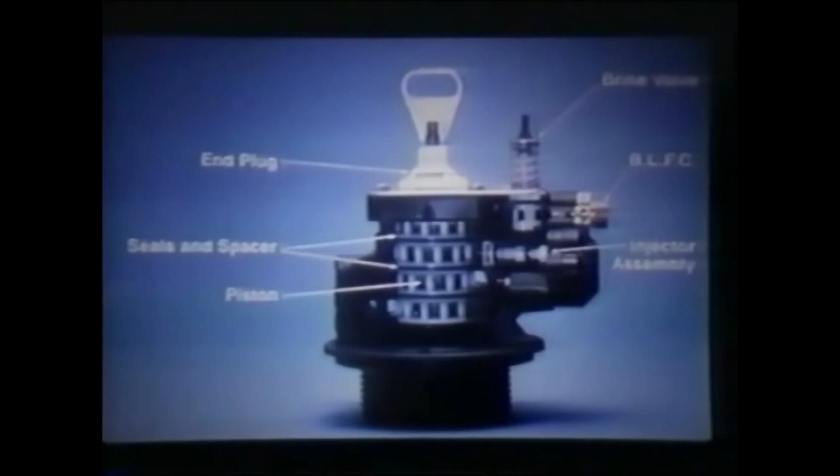The first area we're going to take a look at is the injector assembly. Again, the key areas of the injector are the injector screen, injector nozzle, and throat assembly. If the screen becomes plugged up with sand, silt, sediment, iron, whatever, it's not going to allow the flow stream of water to go through the injector assembly and create the suction to draw the brine solution. Cleaning it again with either a brush or a muriatic acid will help keep this area clean and free flowing.

The other area to take a look at is the injector nozzle and throat assembly, and again we have those color coded. Reviewing that color code, it's red, white, blue, yellow, and green, representing the numbers 0, 1, 2, 3, and 4. Those colors of the nozzle and the throat assembly must always be the same color and match. You cannot mix yellow and green, red and white.

The other section you're going to see here in the control valve when that module is removed is this air disperser. That assembly is put into the control valve to help keep the throat of the injector assembly basically primed. Whenever you pass a vacuum on water, you actually draw some of the air out of it. To keep this throat assembly always primed with water and not become airlocked, that air disperser is put in there to put a little back pressure on the injector assembly to keep it drawing at all times.

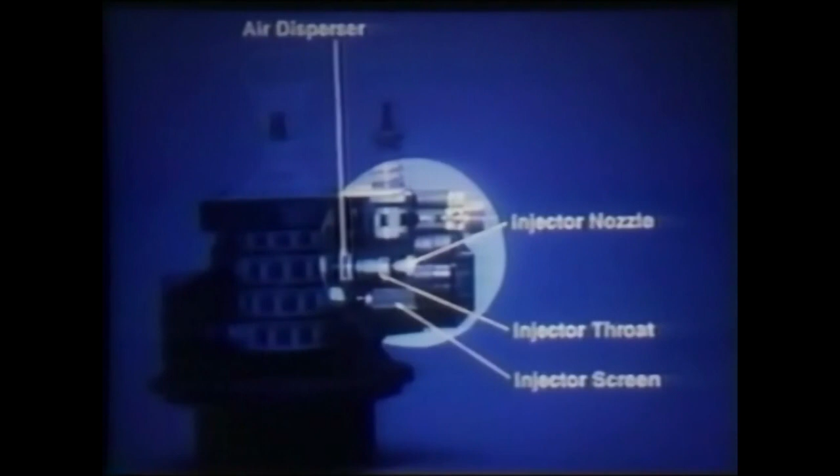Removing this assembly, checking to make sure that the air disperser is still installed would be the key thing. The brine line flow control assembly, and reverting back to the BLFC, checking the brine tank for the water level.

If we had an extremely low water level in the brine tank where it barely refilled, that little rubber washer, the BLFC button down here, could become plugged with foreign material. Disassembling that assembly, cleaning it out of the foreign material, and when reassembling, note that the bottom section has some numbers on it and a beveled side where the hole goes through the rubber washer. That goes down into that retainer. There is no top or bottom to the retainer, so it doesn't make any difference which side you have up. But the rubber washer with the numbers goes down into there, then slide the whole assembly up into the fitting.

This assembly works like a check valve. When we're refilling into the brine tank, that rubber washer is pushed into the brass fitting, and we control the water going in. When we're in the brine draw cycle, that rubber washer button comes out into that retainer, and the brine can flow around the outside and through the center unrestricted. But if that becomes plugged up, a low water level will be noticed in the brine tank.

The third area in the injector drain module assembly is the brine valve. If the brine valve becomes stuck or foreign material gets underneath this half-moon rubber seat at the bottom, we're going to have a high water level in the brine tank, higher than normal, possibly overflowing. The complaint could actually be salty water.

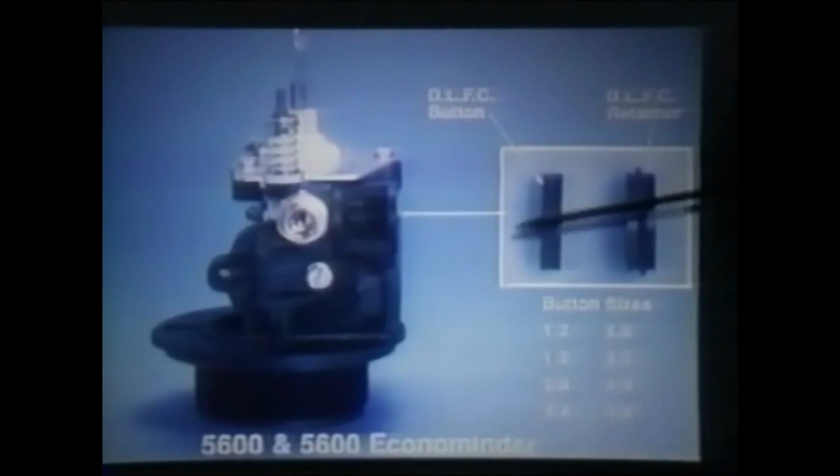Internally to the control valve, the only reason why you have to get inside the valve for either the seals and spacer assembly or the piston assembly is if, number one, we have a leak at the drain; number two, water or leak comes out the top of this end plug assembly; or number three, we get some foreign material hung up in this piston assembly to where we can't manually cycle that piston up and down.

The piston assembly, when it's removed, what we're looking for, especially if we have a leak at the drain, is if we have any nicks or scratches in this Teflon coating on the outer edge of the piston. If there is, the cutouts in here are basically drain ports, and the water actually then goes out the drain. A leak at the drain is your main indication.

We do have two types of pistons available. The one that's shown here gives us our normal cycles of operation: preliminary rinse, backwash, brining, slow rinse, rapid rinse, settling rinse, and then back into service.

We do have what we call a low water piston, which cuts the backwash and settling rinse times down, and actually water used per regeneration is cut in half. This top groove here is removed, and that cuts down on your basic high flow situations of preliminary and backwash cycles.

Also, when reassembling this assembly back into the control valve body, take silicone as a lubricant, rub it around the outside, and then slip that assembly back into the seals and spacers.

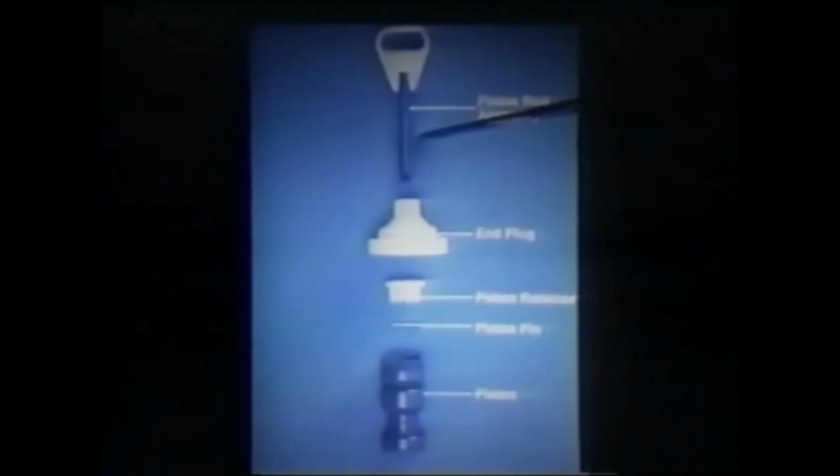The end plug too is a key area, if the little seal ring in there becomes worn over a period of time, causing a leak coming out the end plug assembly. The other thing to check is the piston rod. That again has a Teflon coating on the outside. Any nicks or scratches in that Teflon coating will cause a leak coming out that assembly.

Now we're going to take a few minutes to talk about the meter assembly and the bypass, and specifically what we would like to address is the 2 different model meter dome assemblies. We mentioned earlier that the standard meter assembly is good for applications up to 2,150 gallons.

Well, if we had a situation where, let's say we had a cubic foot unit and 24,000 grains of capacity recovered, but we only had 4 grain water, we would have 6,000 gallons of capacity, but we would not have room on the meter program wheel to program anything in excess of 2,150 gallons.

So what we simply do is add what we call extended range, referring to this additional small dome on the top of the meter dome, which gives us an additional 5-to-1 gear reduction, meaning in terms of our programmable gallon readings, we can now put up to 10,500 gallons on the meter program wheel.

So in our example where we've got 6,000 gallons of capacity, we would deduct something for the reserve capacity and program opposite the white dot, let's say 5,500 gallons if that's the appropriate usable number that we had.

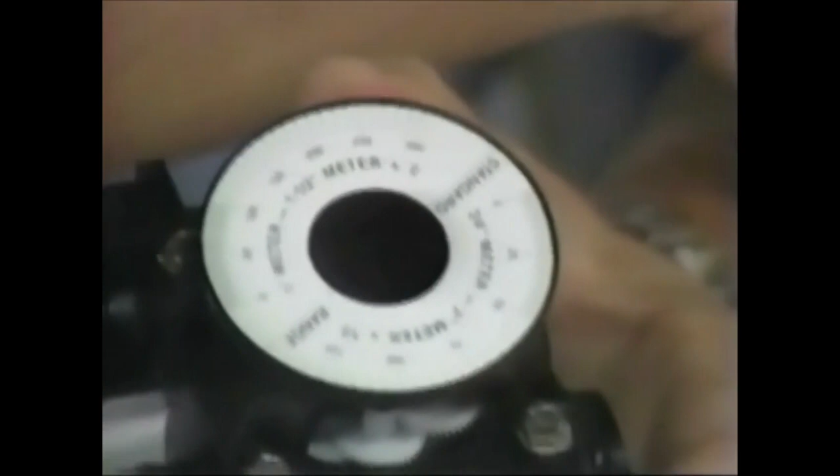The meter cable, which will be out the back of the control, and we're going to insert a little finger indicator, which has a very fine hairline molded down the center of it, and we're going to put that right over the end of the key on the end of the cable. And now we're going to plug this end of the cable in. This will be in the back of the timer.

What we want to do now is just open up a service tap and let a few gallons of water pass through. As the water is used, if that impeller is registering flow properly inside, what we will find is that the little finger indicator on the top will begin to pass over those gallons, which are scaled on the scale of the label on the top of the meter checker.

Okay? The second step, if that checks out, we want to make sure that the clutch assembly in the timer is working properly. And let me demonstrate how that's done.

Notice as I turn the cable, the program wheel turns counterclockwise. Eventually it stops, and when it gets to the 270-degree position of the manual gear, we pick up a clicking noise, which is simply the clutch mechanism slipping, and each click represents approximately 50 gallons of water.

Now, some of the obvious questions I've heard asked at previous service schools are, will the clutch ever wear out? Keep in mind that clutch slipping, each click being approximately 50 gallons, only happens when it's on reserve capacity. So the likelihood of it wearing out is virtually nil because you're not going to have it working in that mode that often.

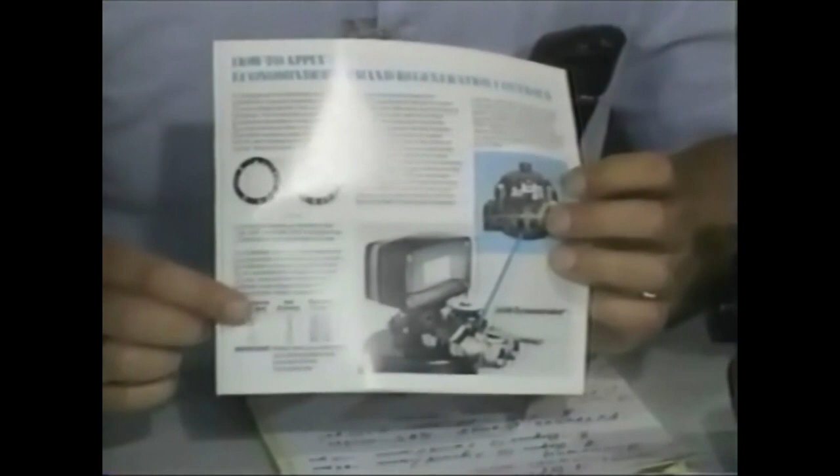Another nice handy thing in here is the explanation of the capacity labels we just talked about. It tells us why we have to have compatibility between a K label on the front program wheel dial and the salt setting on the back. So for those who may want more in-depth detail as to how the K labels and salt settings must be matched up, that information is in the centerfold of this book.

There's also some information for the salespeople in the organization up front, about why demand regeneration systems are the buzzword of the industry today. They save salt, water, sewer use taxes, use less salt, therefore you carry less home from the grocery store, and they may find that interesting in the sales department.

The next thing I'd like to cover is when the meter was being developed back in the early 1982 period, we had several problems, and we did have a recall on the meter assembly. Every meter up to, I guess it was the 9,000 serial number, in the low 9,000 area, was recalled at one time. There was a variety of different problems that plagued the meter assembly at that time.

There is a tag which we have on the valves that we used earlier, a metal tag that's mounted under one of the 4 dome mount screws, which tells us the serial number of the meter. Now there's nothing to worry about today because, as I mentioned earlier, there are over 200,000 meters out at this point in time. But I do want to acknowledge that there were problems in the early years with the meter.

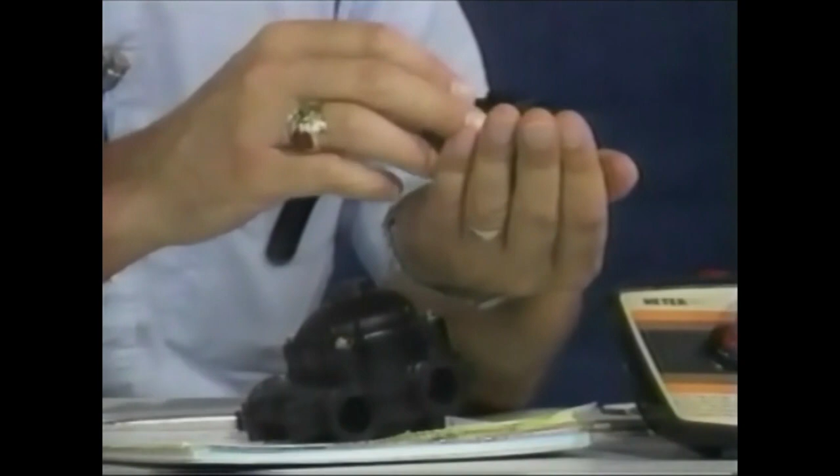Then when you put the new dome on, have the dome assembly in the palm of your hand upside down. You can hear that noise in there. That's the slack in the gear train. We have to get that slack in the gear train such that when the dome is positioned upside down, then we take the meter base and put it on top.

Using that procedure, we can then be assured that the output shaft in the bottom of the gear assembly in the dome matches up with the small gear teeth on the top of the impeller, and we don't have any galling of those gear teeth.

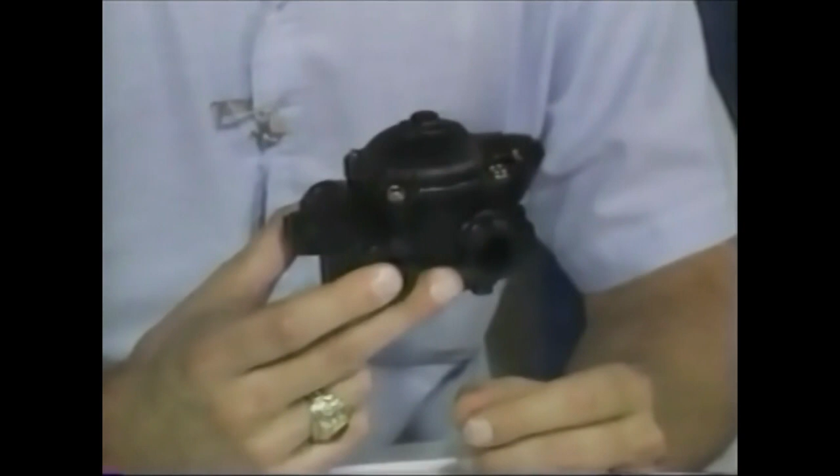But as I said earlier, it's best in the infrequent situations where you should have a need for a meter, change the whole module. That's the easiest way to go.

Excuse me, Bill, before you go any further, can I just have the meter and the meter checker? Sure.

And the meter. One thing, when you are checking out a meter assembly, determining whether or not it's registering gallonage, and when Bill said put it on there, you'll notice that we have a number of scales around the outside perimeter. This one meter checker can handle a wide variety of different meters that we manufacture: 3/4 inch, 1 inch, 1.5 inch, and 2 inch meters.

The type of meter that's used on a 5600 is considered a 3/4 inch meter. So when you put the dial in the front and you insert the cable in, we're looking for the 3/4 inch meter, which is this scale right here.

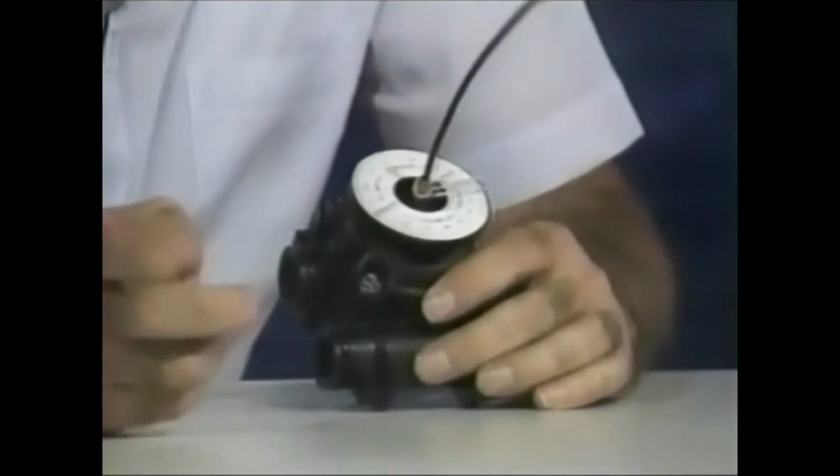We just turn that clear pointer, that finger pointer, to the 0 position, then run water at the stationary tubs or some conditioned or soft water outlet port, and each one of the hash marks represents 1 gallon. So 10 gallons run off, 10 hash marks.

If the cable's inserted here and into the timer assembly, then the malfunction or the problem has to occur something outside of the meter assembly.

Okay, thanks, Mike. Many times when we think we're going to need to use the meter checker, what we really have is a capacity problem, as Mike related to earlier. If there's a large amount of water that's going through the service lines of the home that isn't being registered by the meter, a leaky toilet, maybe that in combination with an RO unit, any number of things, we may feel that the meter is not registering flow because there is a high proportion of the total water going through at less than 1/4 gallon per minute.

The meter checker really, if the impeller is turning and evidenced by the movement of the little finger indicator on the top, what we should really do is take that hardness reading from when we tested the water in step 2 of BTTB and go right back to the front of our timer and make sure that we've got the appropriate program on the timer.

Do we have the right number of people in the family? Do we have the proper hardness? And if there's iron in the water, did we compensate for it? Did we allow a factor of 4 for every part per million of iron and add it to the hardness? If there's an RO unit under the sink, did we put in an additional person?

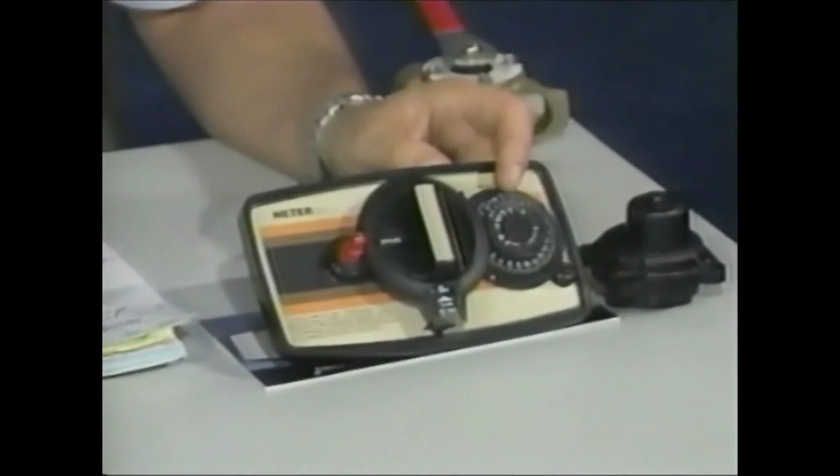Because a typical family would use an average of maybe 75 gallons of water per day per person. So if you had a family of 4 and found the unit was running out of conditioned water the day before regeneration consistently, that tells me right away it's a capacity problem, because the unit regenerates automatically — the only problem is it regenerates one day too late.

So what we have to do is go right back to the timer and find out why we're always one day too late. We'll probably find there's a reason for water flowing on a somewhat continuous basis through the service lines of that home that can't be registered by the meter. And so we adjust for that.

We can either add a fictitious person to that family, meaning we're putting an additional 75 gallons of reserve in the program, or increase the salt setting so that we get more capacity recovered on regeneration. So if you have the thought that the meter may not be working — 8 or 9 times out of 10 — it might just be that we don't have the right program on the front of the timer. Just keep that in mind.

Okay, then the next thing I want to spend a minute on is the bypass assembly. It's an optional extra that's available. It's a very handy device because when we install the unit, we only have 2 connections to make on the house side, since it's already mounted to the back of the valve.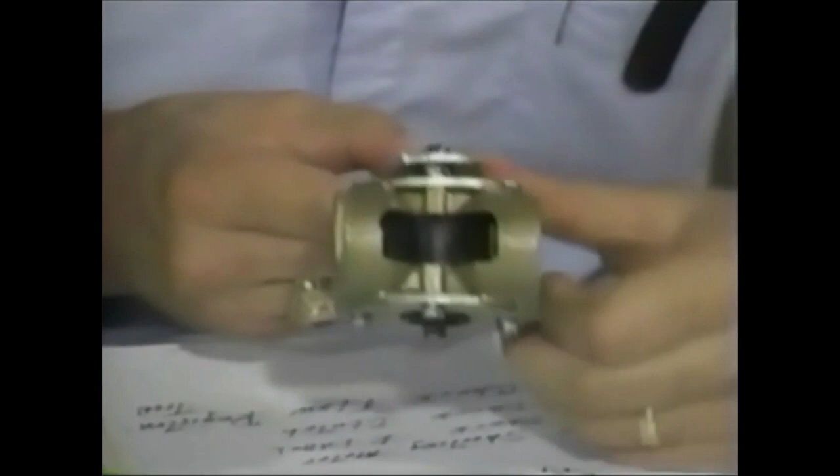It's kind of a unique bypass valve because there's no moving part in stream. The part that moves when we throw the handle from service to bypass is a molded plug, actually inside that rubber boot. So when we turn the handle, we're flexing the boot — we're not moving anything in stream.

This means if the bypass valve is in service position for 3 years and the serviceman comes out and has to put it on bypass to work on the unit, the handle won't be stuck in a permanent position because there's no moving part that can seize up from sitting that long. We'll find it moves relatively easily from bypass to service or vice versa, regardless of how long it sat in that position.

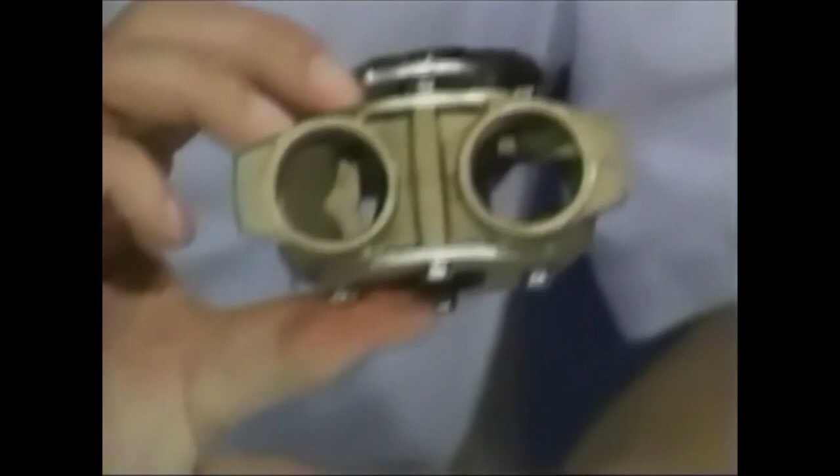Another point I'd like to make: if you held this up to the light with the handle in the service position, you'd see just a sliver of daylight coming through. That shouldn't lead you to believe there's excessive pressure drop across the bypass, because if I take my pen and press in on the rubber boot, you'll see it moves — exactly what happens when water pressure acts on the rubber boot inside.

So when it's under water pressure, there's full flow through here. Yes, there's a pressure drop, but it's very slight — nothing like what you might believe if you just held it up to daylight and assumed excessive pressure drop because of just a sliver of daylight.

In installing the bypass valve, it's mounted to the valve on one side. We have to be careful not to transfer heat to that rubber boot inside and the plastic plug which flexes the boot. So we always recommend soldering at least 4 inches away on the inlet and outlet side of the bypass, and if you can, use a solder with a lower melting point.

Not like silver solder. I understand that in some areas there are codes where you can't use 50-50 solder or other grades of soft solder. But if you must use 95-5 or silver solder, which has extremely high melting temperatures, make sure you put a wet rag over the top of the bypass and keep the heat at least 4 inches away from the end of the bypass.

You may want to go in with your pipe thread to sweat adapter, maybe sweat an extension on that so that we can work even further than 4 inches away from the bypass. That'll help when you get the unit installed and the toolkit closed up, and you throw the bypass handle into the service position, there's not going to be a chance that you have water leaking out because of the rubber boot inside being burnt or the plastic plug being deformed. So if you take that extra care in installing, the bypass valve should last well beyond the life of the unit.

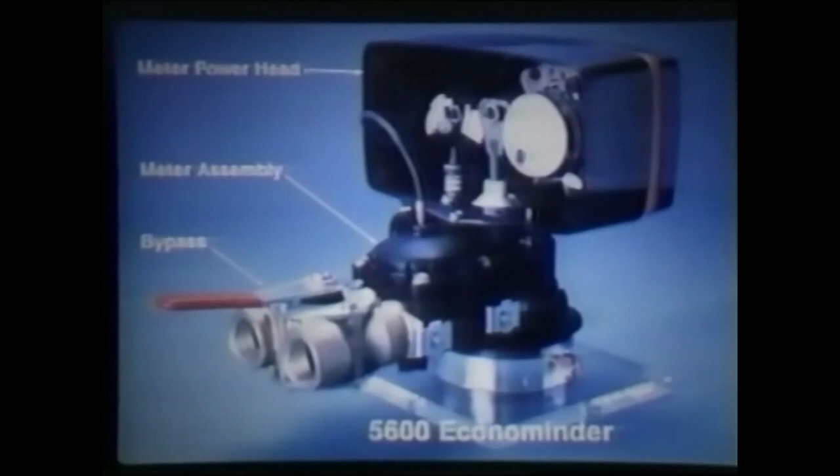A few final comments on the meter assembly. On a tag mounted beneath one of the 4 meter dome screws, we have a metal serial number tag that tells us the date the meter was assembled and the customer for whom it was made. It also gives us insight as to how many controls were made in that production run. If you have any questions on the meter assembly, it's sometimes helpful to refer to that number when contacting the factory, and that will give us the point in time when that meter was manufactured, helping us answer questions that might come up. It's also the date that tells us the beginning of the warranty period for the meter, 36 months forward from the date that serial number indicates.

Should you ever feel a need to replace the meter assembly, we would suggest the whole module be replaced, not just the dome. Should you ever want to replace that dome, remember that when you put the assembly back together, we must tip the meter upside down and remount the new dome assembly. Also remember that the amount of torque you put on the 4 corner screws should be nothing more than finger tight, because we have an O-ring seal between the dome and the base of the meter, and 5 inch-ounces of torque is all it takes—basically by definition, that's finger tight. No wrenches required. It wouldn't hurt if it was turned a quarter turn beyond that, but it really isn't necessary.

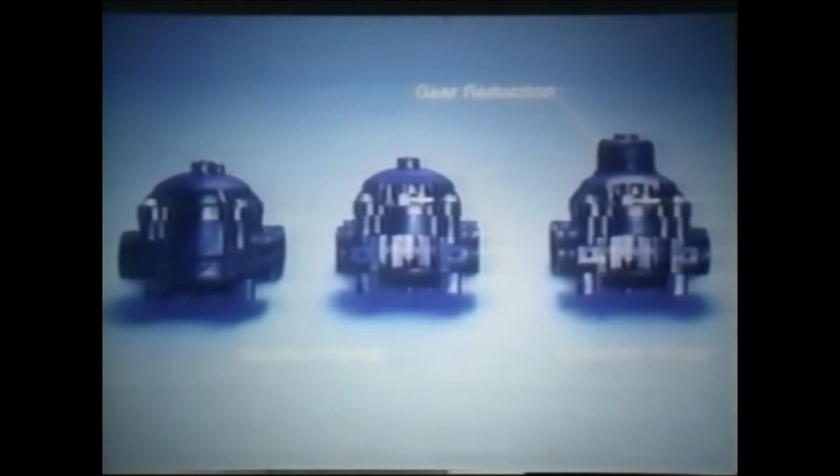The three basic components to the meter body assembly are the standard gear train, comprising 8 small step-down gears which are sealed in the dome assembly, the impeller, and then the base of the meter body itself.

We're going to wrap up today's session with a list of service and installation tips, and let's start with a couple of items that we've already mentioned that we can't overemphasize: always use only silicone-based lubricant.

That covers the seal O-ring and any internal parts. Try to use liquid or paste. Don't use silicone in aerosol cans, because many times the propellant is petroleum-based, and that has the same adverse effect on the plastic and rubber parts as a petroleum-based lubricant would have.

The second thing we'd like to remind you of is, let's not use pipe dopes on the drain line connection. There are about 38 different pipe dopes on the market, half of which adversely affect plastic, the other half do not. What we want you to do is use 2 wraps of Teflon tape and make that connection hand tight. You're venting to atmosphere, so there's not going to be any great pressure at that connection, and there's no pipe dope necessary, and really no wrench necessary if we just snug up that fitting hand tight.

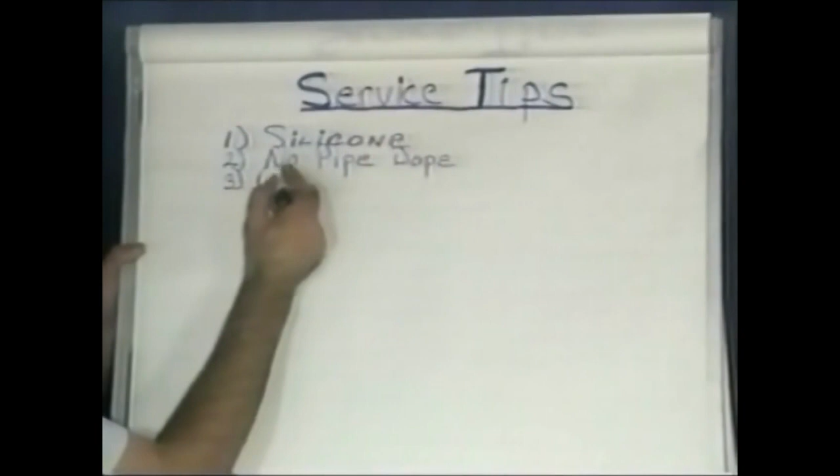The next thing we'd like to suggest is, when you solder, solder at least 4 inches away from the bypass valve or the yoke. The reason for that is we don't want to transfer heat to any of the plastic or rubber components, and if you can, we want to avoid using silver solder. In some areas you can't. In those cases, make sure you put a wet rag over the bypass to protect the plastic plug and the rubber boot inside.

The next thing we'd like to cover is the date coding of the motors on all of the controls. We use a 4-digit number to indicate a date code. For example, take the number 2144: the first digit, the 2, represents the month of the year when that motor was made by our supplier. The middle 2 digits represent the day of that month, and the last digit represents the last digit in the year. Since we have a 36-month warranty on our motors, it's important that you be able to interpret those numbers.

When you do send a motor back to the factory, take some care in wrapping it up, so that it doesn't arrive at our place with a dented cover, because we'll assume the motor was dropped and that was the reason it failed. So we do expect motors to arrive at our shop, if they're in warranty and you expect a replacement, at least in a state where they're not physically damaged.

The next thing we'd like to remind you is always use an air gap on the end of the drain line. It's code in many areas of the country. It's important for 2 reasons: the health aspects, and secondly, many times the injector assembly will not work if the end of the drain line is underwater anyhow. So always use an air gap.

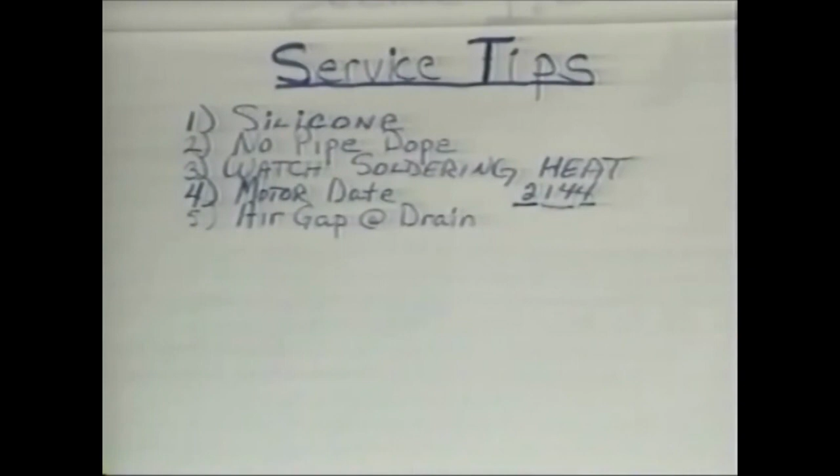The next tip is kind of related to the use of an air gap: don't ever put a drain line directly into a sewer pipe, because that definitely is against the health codes, and you could have very serious problems if you do that practice.

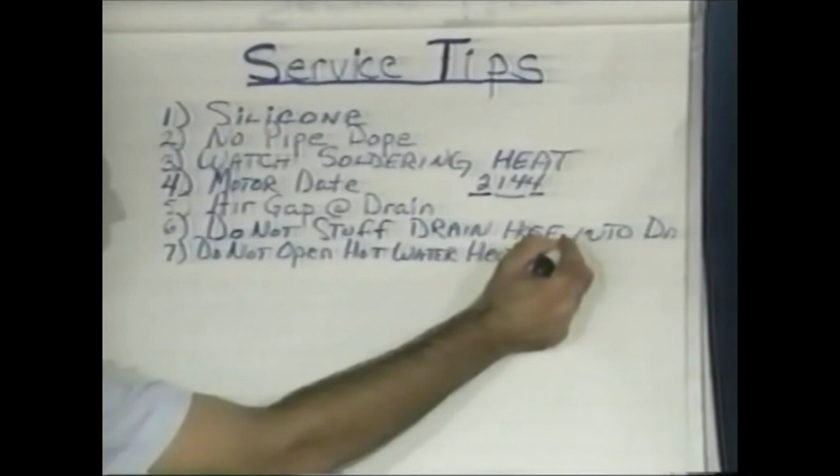When you're working in a home and you're tempted to get all the hard water out of the water heater, get rid of the temptation. Don't open the drain valve on the bottom. The reason for that is there's going to be scale in the bottom of the water heater, and some of that scale, precipitated, may end up in the area of the valve right on the seat. If you try to close off the valve after you drain the water out, there could be scale there, and you'll permanently damage the hand valve—you could become the proud owner of a water heater, because the thing cannot be shut off after you've got a permanent dent in the seat of the valve.

So leave the hand valve closed, and just let the hard water that may be in the water heater get out through normal use of hot water. As Mike said earlier, it'll usually take about 3 times the rated capacity of the water heater in total flow through in order to rid the water heater of the hard water.

Never mix injector throats and nozzle colors. We covered that before. They must be compatible: white goes with white, red with red, and so on.

The next point is when you go on a call and the unit is leaking to drain in the service position. That's a key to go into the main valve and look for either a damaged seal, a damaged piston, or a broken spacer. That's the only time you really want to tear into the valve, when you have water leaking to drain, either dripping or a constant stream, while the cycle indicator knob on the front says you're in a service position.

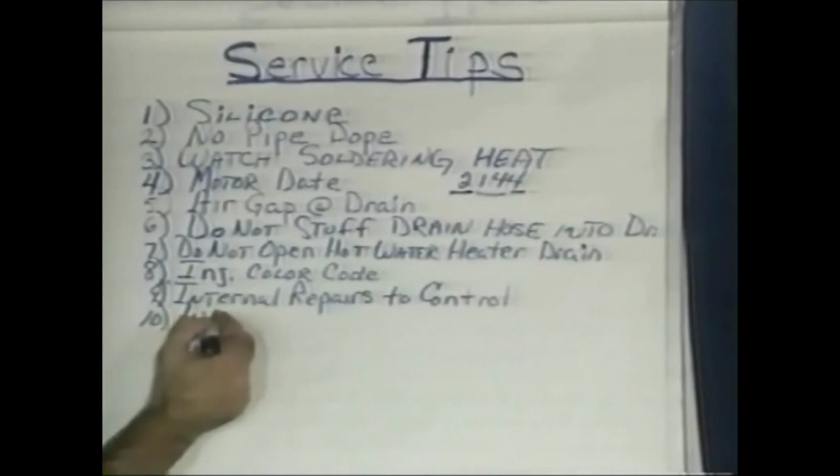Don't forget to compensate for iron. We suggested using a factor of 4. Every part per million of iron, multiply times 4 and add it to the hardness. That's going to assure you, especially on your meter installations, that the meter will be calling for regeneration at the appropriate time, instead of supplying hard water for an extra day and then you getting a phone call and having to go out, reset the timer, and compensate for that iron.

When we manually regenerate the control, turn the manual knob until you hear 2 clicks. It will be in the regen position as shown by the call out on the front. You should see water running to drain almost immediately after you turn the valve to the regen position, slow at first, gradually building up to the rated drain line flow control rate.

But give it time. Don't turn it to the regen position and say, well, it's not flowing at 1.5 gallons a minute or 2.5 gallons per minute, whatever the flow control size is on the drain line, so there must be something wrong. Remember, the piston lobe has to position itself in the appropriate spot opposite the adjacent ports in the spacer before we're going to get full flow.

Another thing to remember when checking out the motors: a warm motor does not indicate the motor is good. If the coil is shorted, the motor will be hot, but the rotor will not be turning. The proper way to check the motor is to remove the cover, look in the back, and look through the sight glass on the back of the motor. If you can see the rotor spinning, then you know the motor is good.

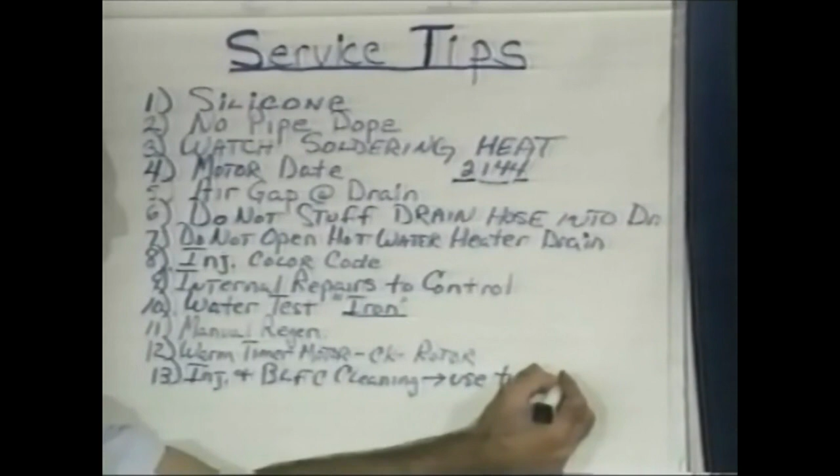When we clean the injector nozzle and the brine line flow control button, always use a round wooden toothpick with a slight taper, because we don't want to put a permanent mark on the inside diameter of that brine line flow control button. We don't want to scratch it or rip it. Likewise, we don't want to put a permanent mark on the inside diameter of the injector nozzle, which is plastic. Once in a while we might be tempted to use a paper clip, but a paper clip is a piece of wire with a sharp, sheared end, and you could scratch or permanently damage the flow control button.

Remember, when using a brine system with a grid, it takes 4 hours to make saturated brine. If we're not using a grid, and we have the total amount of water that refills the brine tank in contact with salt, and the salt level is above the refill liquid level, it only takes about 10 minutes. But when we're using a grid and the salt is supported up above the refill water, with only about 1 inch of water in contact with the salt, it'll take a full 4 hours at 70 degrees Fahrenheit. Keep that in mind, especially on light commercial applications where we're regenerating a twin system.

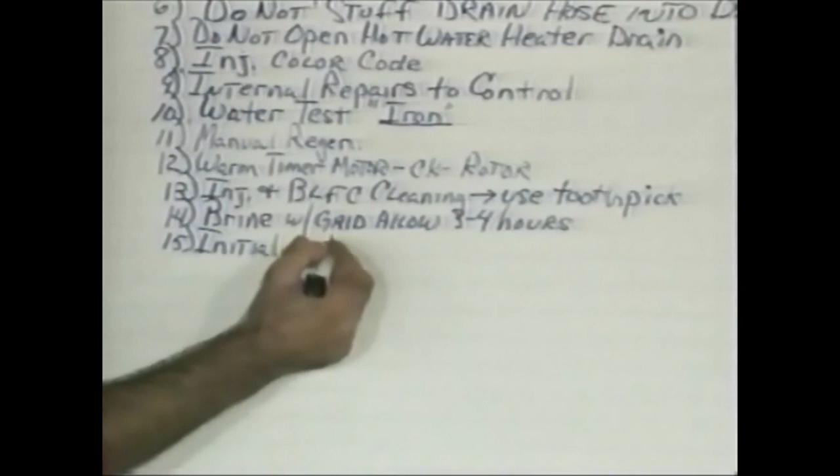Another point, this is for the installer: make sure the unit is in the service position when you pressurize a tank. Sometimes installers feel that if the valve isn't in the backwash position, we'll trap a head of air permanently in the tank. That head of air isn't going to hurt anything, because we'll purge it out after the tank completely fills with water. The problem you could run into if you have it in backwash is you may lift some of the resin fines up into the piston seal spacer area in the valve, and then we're going to have the leak-to-drain problem right upon completion of the installation.

And so we want to keep the media in the tank, and the best way to do that is have the valve in a service position so that the tank fills with water, with the water coming into the valve and flowing down through the system instead of coming in the bottom distributor of the tank and rising up through the valve.

The next thing we want to mention is do not lay a unit down when you're transporting it from your shop over to the job site. Again, you could get some of the resin up into the valve seal piston spacer area, and that could cause a leak to drain.

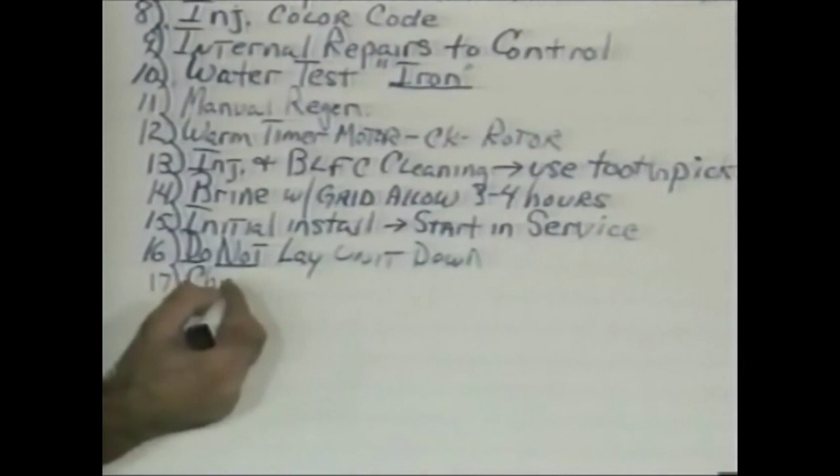Another thing, kind of obvious, we don't want to see them installed backwards. Our inlet and outlet orientation on the back of our control is the opposite of another popular valve in the marketplace. We do have raised arrows embossed right in the brass casting on the bypass valve and on the yokes to remind you that as you look at the valve from the back, the right side is the outlet and the left side is the inlet.

If you should install a unit backwards, and if it should be a metered unit, the meter program wheel will turn the exact opposite direction, and you will never get an automatic regeneration because the pointer on the meter program wheel will be approaching its index point from the opposite direction. So install them with the inlet on the left side as you look at the valve from the back, the outlet on the right side. And if we should forget that, just take a look at the embossing on the back of the yoke of the valve or on the bypass, and we'll see some arrows embossed in there to remind us.

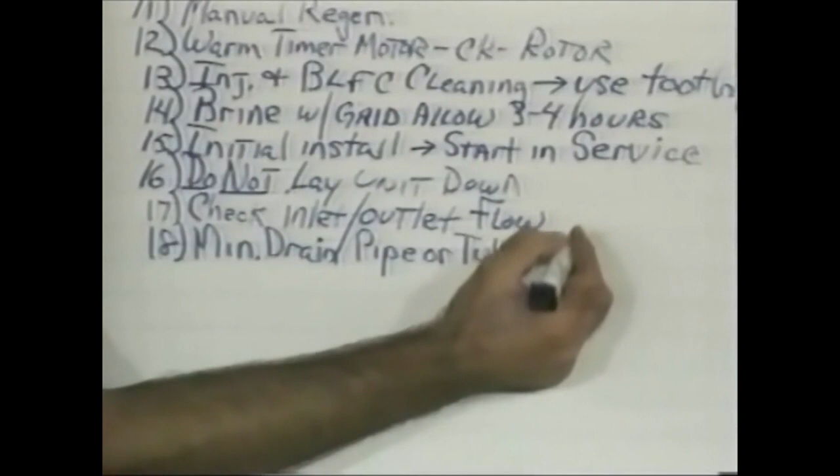Another tip comes in the area of the drain line configurations and the size of drain lines. Let's always remember to use a minimum 1/2 inch diameter. The reason we like to see you do that is sometimes the drain lines have to be long, sometimes we get by with short ones, but if we can kind of standardize on a 1/2 inch diameter drain line, the likelihood of an injector getting too much back pressure from the friction loss of an extremely long, small diameter drain line is not going to be there.

Also, if we're installing a unit in a basement, as many of the units are installed in the northern parts of the country, many people have their basements fixed up with recreation rooms. The drain line may go up to the ceiling and then run across to the opposite end where it drains into a sump pump. In those cases, we get additional back pressure from the vertical rise from the valve up to the ceiling. So if we just use a 1/2 inch diameter drain line, there won't be any problem at the injector.

Another thing we should mention, and this applies to outdoor installations, particularly in the extreme south where it's common for outdoor installations: if you suspect freezing, you should take precautions and somewhere in the service line open up one of the service taps just a little bit so that water will drip through or run at a very slow rate through the evening, through the night.

Traditionally, on average, a couple times a year, even as far south as Tucson, Arizona, and halfway down the state of Florida, we'll have freezing conditions, and we should have the homeowners alerted to the fact that if there is going to be freezing weather and the unit is outside, the mechanical force of ice forming inside the valve is so strong that nobody can guarantee the valve can withstand that force. So the best thing to do is warn them to have one of the service taps open so that we have water moving continuously through the valve so it doesn't get an opportunity to freeze. We want to remember that on the outdoor installations.